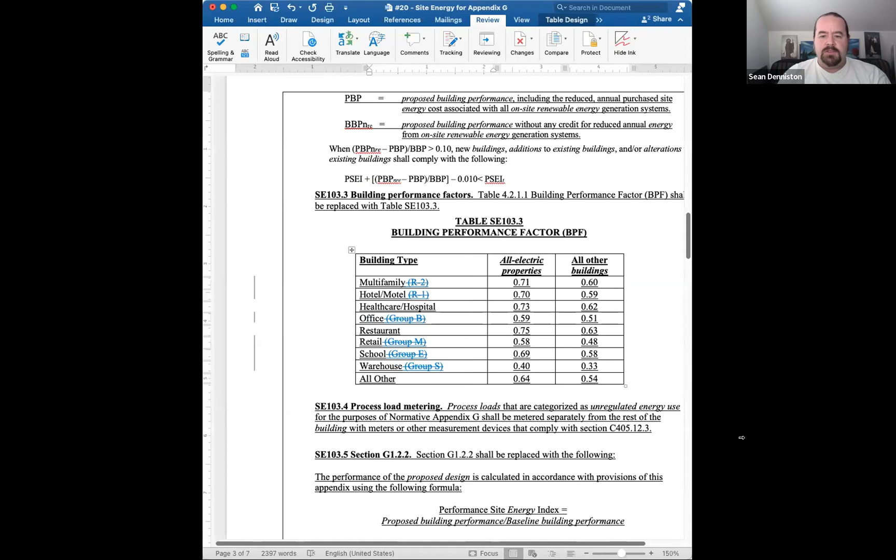So I can give a re-summary if the committee wants one, but in the interest of time, I'll just let it go to discussion. But we want to cover this completely. So if you do want us to go back through key elements, then we certainly can to get everyone back up to speed.

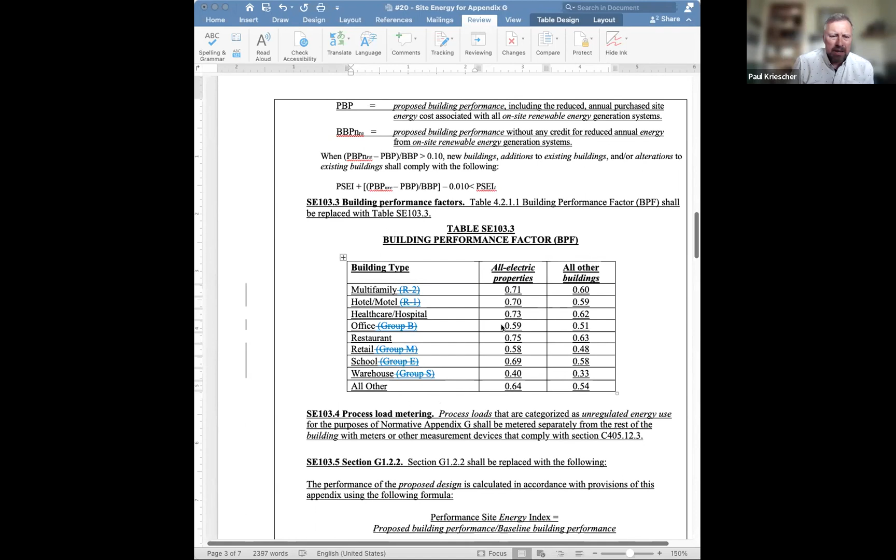Sure. So this proposal does a handful of things, and we'll cover what it does on that overview scale. Different from the last time the committee saw this, not the last meeting but when it came through the first round, the big difference is that the site energy compliance path has been moved out of C407, where it was nested with the energy cost Appendix G approach, and it's been moved into a standalone appendix. This is just for improved usability, so everything you need for site energy compliance is here in this appendix, and C407 is not cluttered with anything from site energy where there's potential for confusion.

Other than that, this proposal is similar to the site energy provisions that were in before. However, ASHRAE has come out with an addendum, CH, for Appendix G, which is using alternate energy metrics like site energy with Appendix G, so we've pulled all of that over. The idea here is we want to leverage the good work that ASHRAE is already doing. The addendum's not final, but it's very close, which means this is very likely what users will see in the next edition of ASHRAE, so this will provide consistency for users as they go through using Appendix G.

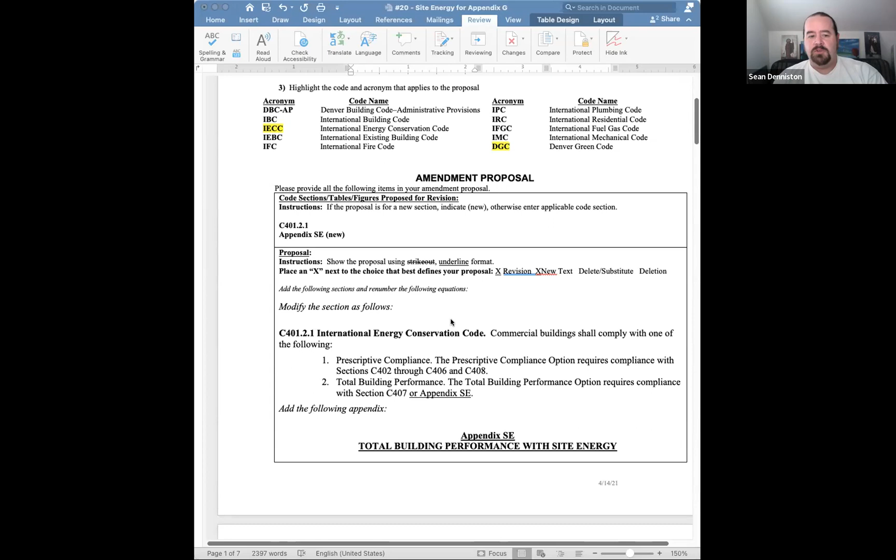Most of the modifications made to Appendix G here are really just to replace energy cost with site energy. So almost all of it is editorial, but that still means you have to hit all of those places where energy cost is mentioned.

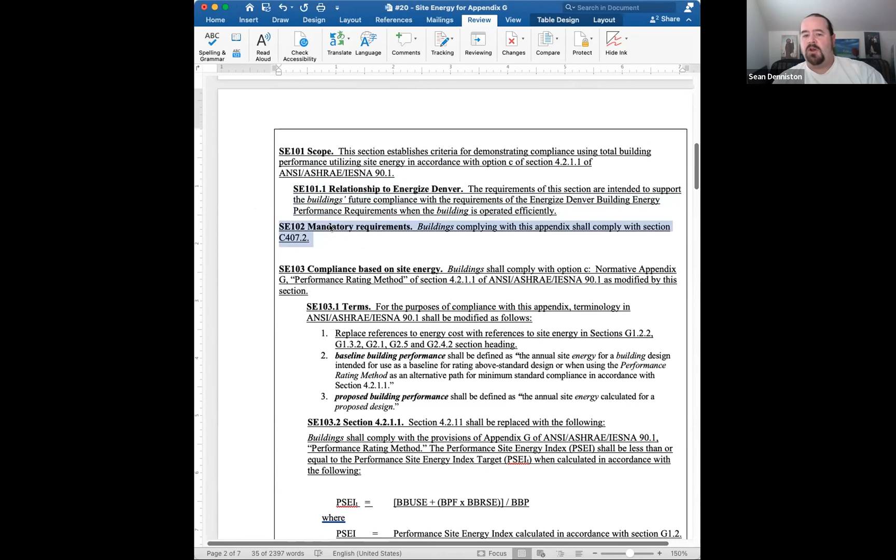A couple of key things here: there's just this pointer I'm highlighting to remind people that there is a connection to Energize Denver. There's no requirements here, it's really just informational, particularly for any practitioners coming from out of market. It includes the mandatory requirements that we saw for the regular Appendix G and C407, just for consistency, so that we're seeing the same mandatory requirements in all of our modeling paths, and that those are as consistent with the prescriptive path as possible. They're not going to line up entirely, but we want them to be as consistent as possible.

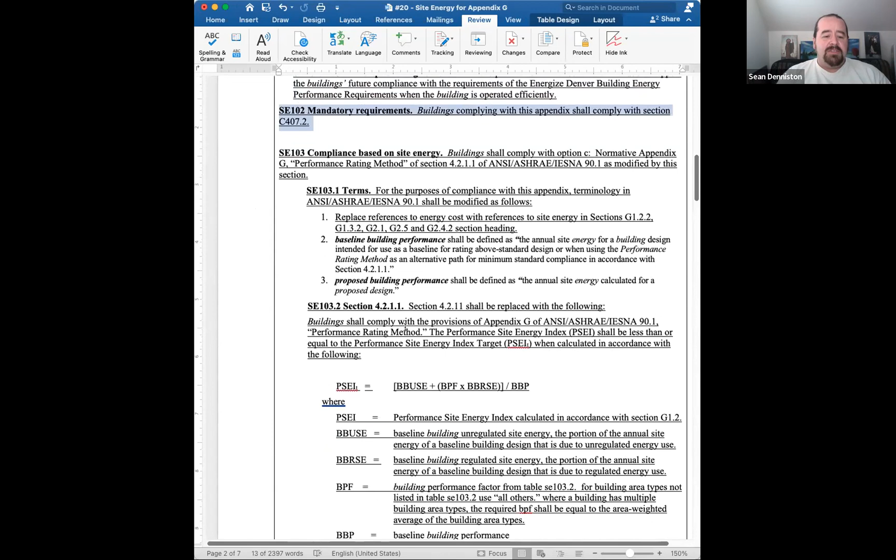And then the last thing to note is, down here in the table, these BPFs are based on the new methodology for creating BPFs, which tends to be a little less stringent in most cases than the old methodology, but these are still BPFs for ASHRAE 90.1 2019. So the stringency level is 2019, even though the methodology is 2021. And you can see here, this is the edit proposed at our last meeting to remove the occupancy types and just have the building types as descriptors, which is what we see in ASHRAE and the modification we've made in the other modeling paths.

So that's the quick high level overview. I'm happy to answer any specific questions anyone might have. Thank you, Sean.

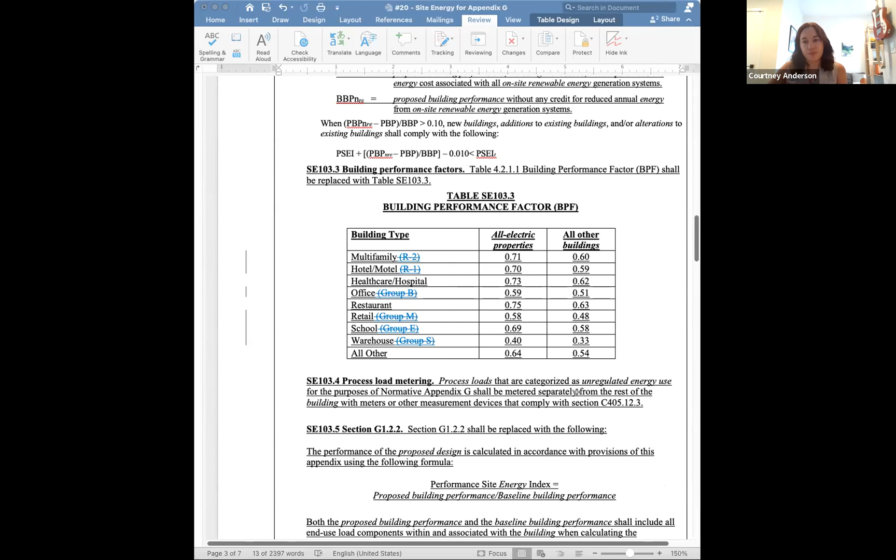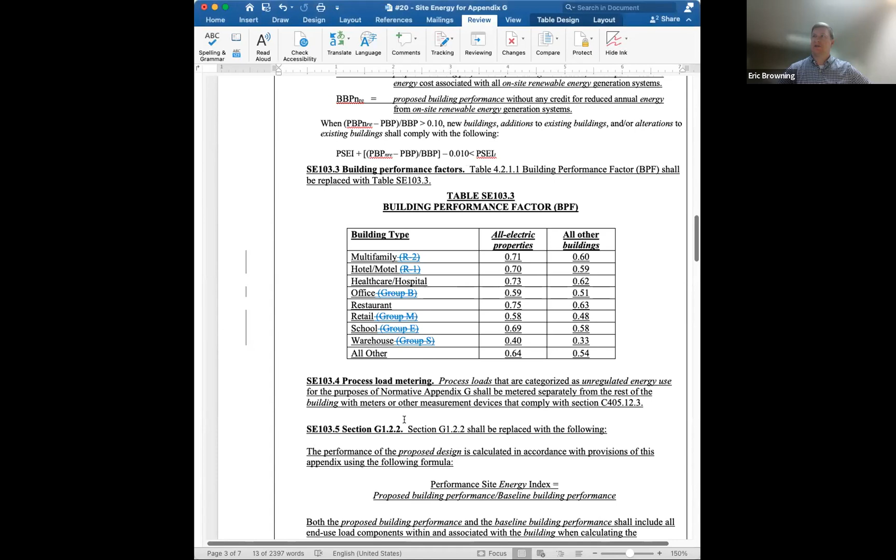Okay, great. Next hand up is Eric. Thank you, Mr. Moderator. I believe this is editorial, but for clarification, under section SE 103.2, which is above the table, in the equation shown, we have PSEI sub T in the primary equation, and then below, I believe we're missing the sub T on the PSEI definition right there. So I think that's just cleanup, I want to make sure we just need to do an editorial cleanup there. That's all, thank you.

Thank you. So the PSEIT is mentioned in the text above where it sets the target. The PSEI is what is actually calculated for the building. So the PSEI needs to be less than the PSEIT. Understood, thank you.

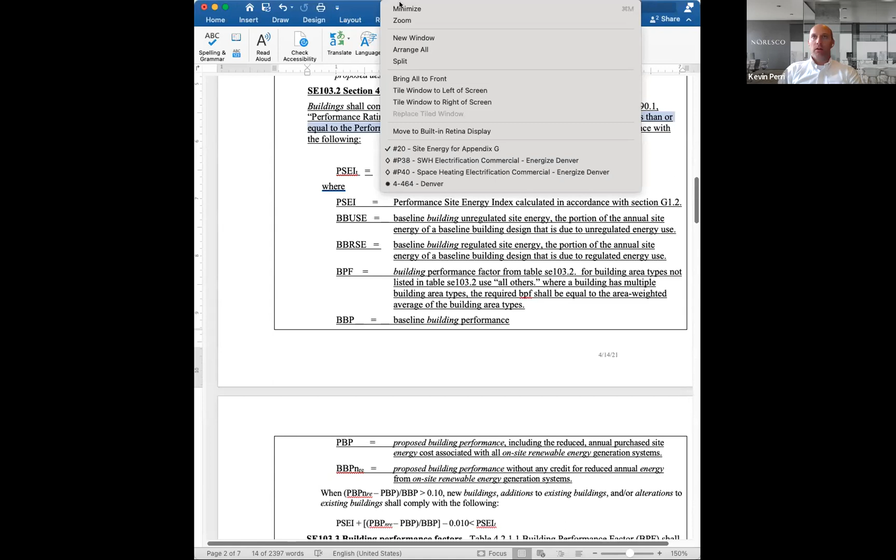Christine is on there. Let's see, I'm going down the list. Katrina, Robbie, and Sean. So if you want to see if we're missing anybody, call out their names to see if someone's filling in for a voting member, and then we'll get a count of voting members.

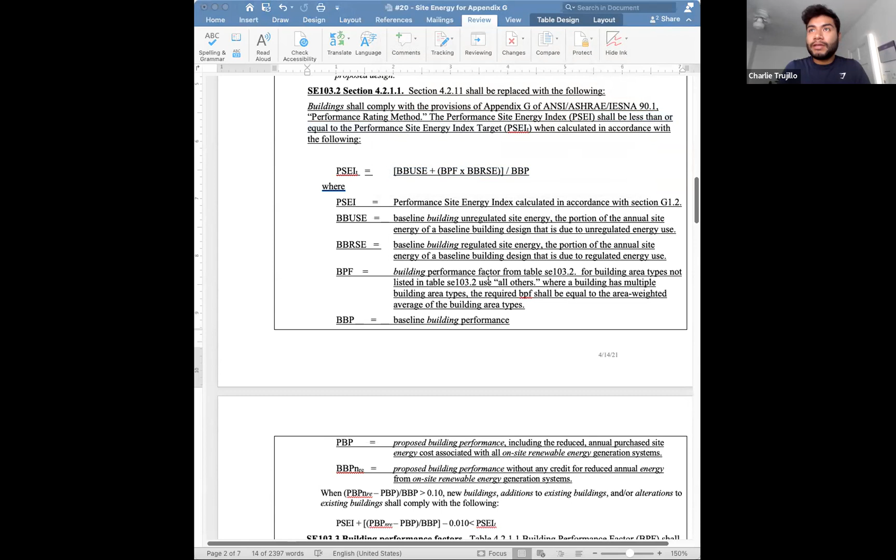Yeah, definitely. I think there might be more names to be accounted for. So I'll just quickly go over the names that are accounted for, and if anybody's substituting for somebody else, just make that known. The people I have accounted for are Aaron E, Alan Y, Brian K, Chuck K, Ashley W, Chrissy C, Chuck B, Courtney A, Elizabeth G, Eric B, Jamie B, John B, Ken U, Laura London, Colin Anderson - both accounting for 1 vote, Linda M, Mike W, and Paul K.

So if anybody is not listed or subbing in - Mike Rodriguez is here. Great, perfect. Got you. So that's everybody. We should have 17 votes being cast in. Okay, thank you. So 17 voting members.

I see John Arent has his hand up. Thanks, Charlie. John's a subject matter expert. John, do you have something to weigh in real quick?

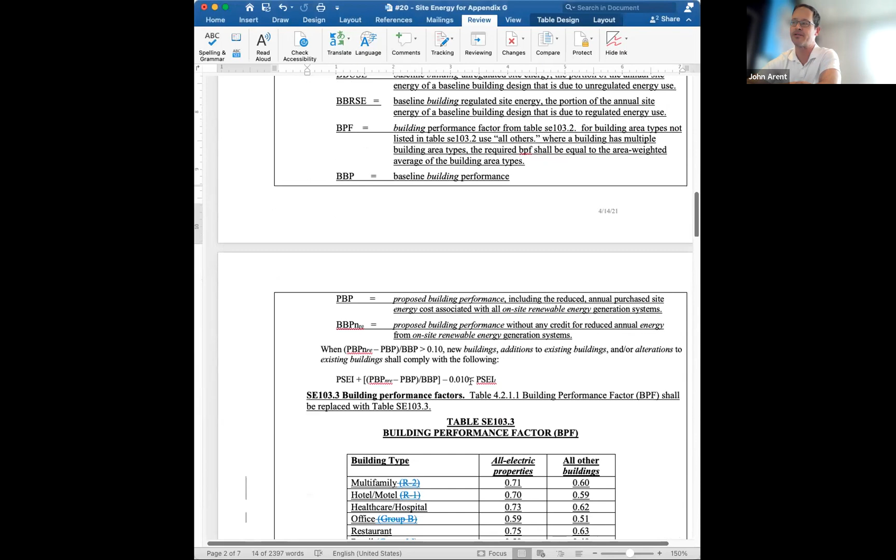Yes, this might be nitpicking, but certainly agree with the intent and everything here. The table for building performance factor lists all electric properties and then all other buildings. I don't know whether we're distinguishing properties from buildings in that context. I think the intent's probably well understood, but just to be a little careful about the classifications. I'm assuming a property could encompass multiple buildings, especially in multifamily.

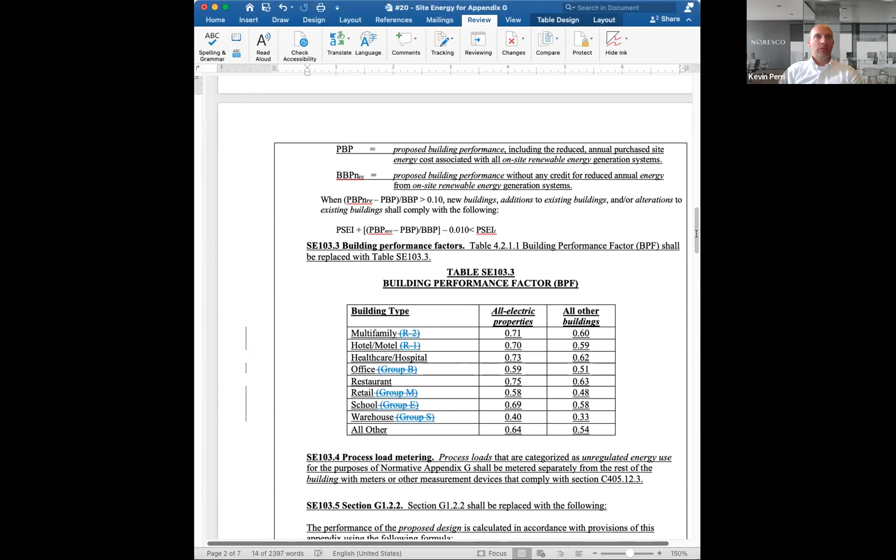Sure, so your concern is that the verbiage isn't consistent throughout, between property and buildings. Right, right. So the definition of all electric properties has been approved already in other proposals, and it's been leveraged as the definition. It was approved as properties instead of buildings so that it would get at gas infrastructure on the building site and not just in the building. Right. Okay, yeah, that makes sense. Thanks, Sean, that's what I was thinking. It might be due to the service wanting to restrict the gas service.

Okay, great, thanks everybody. We do have - looks like Sean stopped sharing there - but we have a motion and a second to approve as amended. So I'm going to call a vote.

All those in favor of approving as amended, please raise your hand. I see some hands move, I'll give it a minute here. I see 14, go ahead, and 15. Go ahead and lower your hands.

All those opposed, please raise your hand. Zero. And all those abstaining, please raise your hand. I see 1. Okay, so item number 20 is approved as amended.

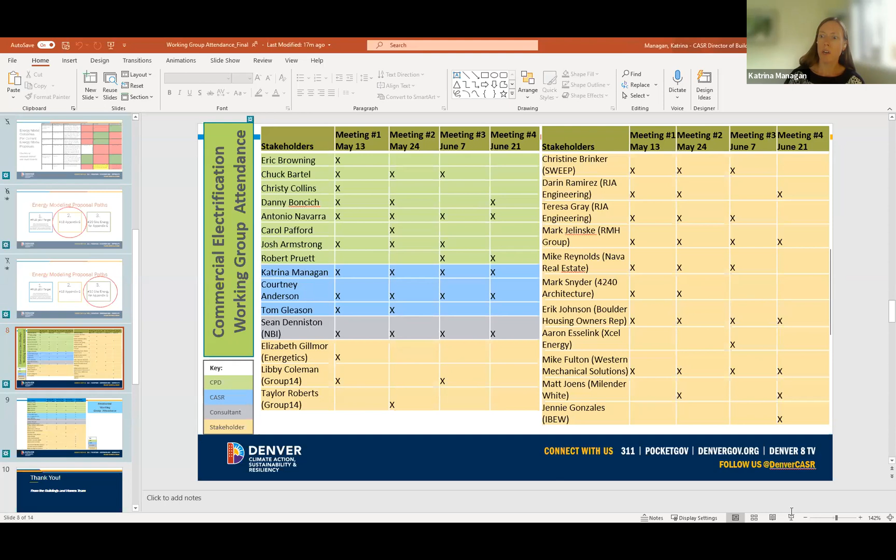I want to share with you who is in the working group now so you can see who participated in the process. This was the biggest working group of all of them, and we had a lot of participants and expertise from mechanical engineers, owners, reps, and developers, from Xcel Energy. We had labor unions there, and energy modelers there.

I would characterize where the working group landed on both space heat and water heat as that sort of careful balance. These proposals are now proposing requirements that are a little bit more ambitious, or have new buildings doing at least as much as is maybe the better description, as Energize Denver.

We restructured the alignment of the proposal so that it really aligns with Energize Denver and does not allow fossil fuel furnaces or electric resistance space heat. Similarly for water heat, we restructured the proposal to very directly align it with Energize Denver, so it does not allow fossil fuel storage water heaters.

Those are the first system types regulated by Energize Denver in 2025. So this proposal really aligns with Energize Denver to require electrification of those easy-to-electrify systems as a first step. There's also an effective date of January 1st, 2024 that gives the community time to adjust. With that introduction, I'll pass it to Sean to walk through the details of the proposals.

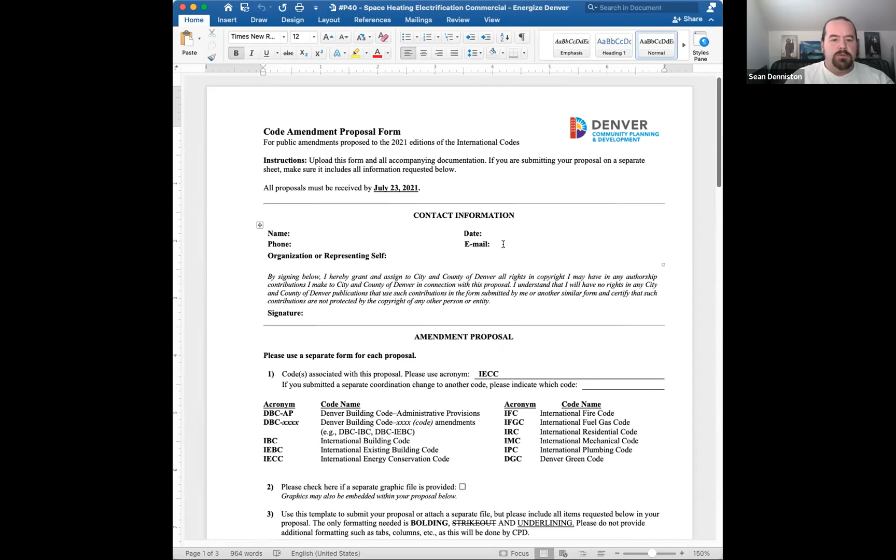So you are looking at the space heating proposal to start with. Let's get to the meat of the proposal. What you'll note is that the opening line is pretty straightforward: it says fossil fuel warm air furnaces and electric resistance space heating equipment shall not be permitted to be used for space heating. So really the key for this whole proposal is the exceptions.

That's what the working group spent its time trying to really dial in, these exceptions, to make sure that reasonable systems that might not strictly conform were still allowed. One of the first key things is that certain building types are required to have their space heating on backup power. Hospitals is a common example. The working group wanted to ensure there was an exception for those, so that backup power systems wouldn't have to be sized for electric space heating, which could be a rather substantially sized system.

It also exempts any makeup air systems where energy recovery ventilation is prohibited by the International Mechanical Code. There are certain situations where it's difficult to do a heat pump system for makeup air unless you're using energy recovery ventilation, but there are certain situations where energy recovery ventilation is not always allowed. There's some nuance to that — you can use specific types of energy recovery ventilation in very specific situations, but we wanted to keep this simple, so we left the exception broad. We wanted to make sure we address this specific design situation.

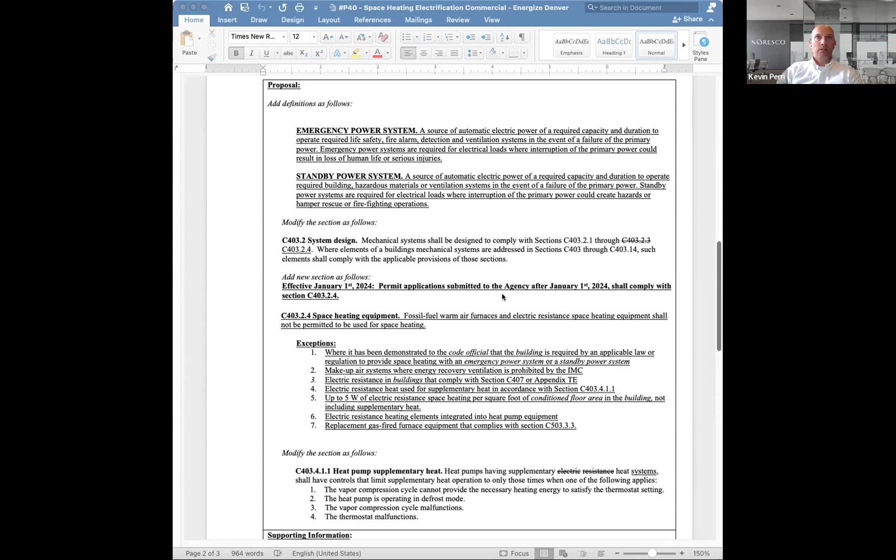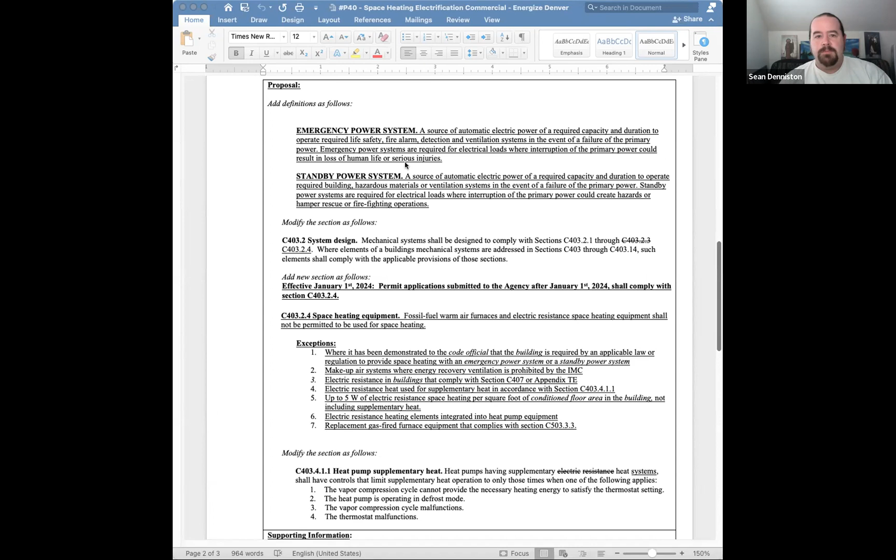Oh, thank you. I'm still sharing the wrong one. Let me share the right one. Oh, still the wrong one. I apologize. I think I have too many things open. All right, are we the right one now? Okay, I'm seeing a couple of nods. Yes. Thank you for catching that.

So in this one, we see very similar exceptions: resistance heating elements that are integrated into heat pump water heating equipment, want to be clear about that. Also, electric resistance elements used for recirculation loop temperature maintenance. This is typically heat trace, but there might be other applications. The idea is that we want to have these specialized heating elements where it's just keeping the warm water warm and it's not the primary system, that we still want to allow that kind of flexibility.

Any electric storage water heaters with a rated storage volume no greater than 20 gallons—so this allows electric resistance for these pony water heaters. You might see these on a lavatory or as a boost heater at the end of line. There aren't good heat pump alternatives for these right now, and the loads are fairly small, so it is reasonable to have an exception for these.

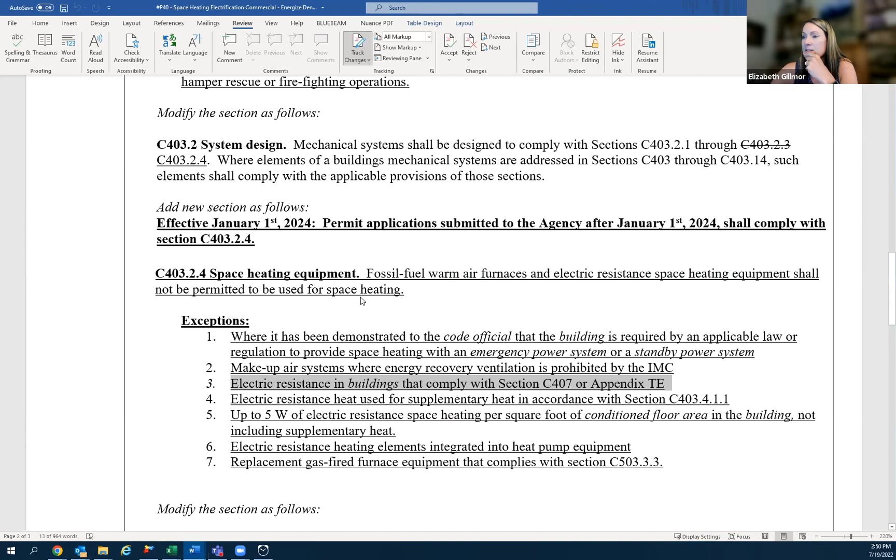Right, so let me make sure I'm understanding. If I compare exception 3 between the two proposals, one difference is the name of the appendix, TE or ET, and the other is that the water heating proposal does not limit that flexibility to electric resistance. Oh sorry, it's not number 3 in this proposal, it's number 9.

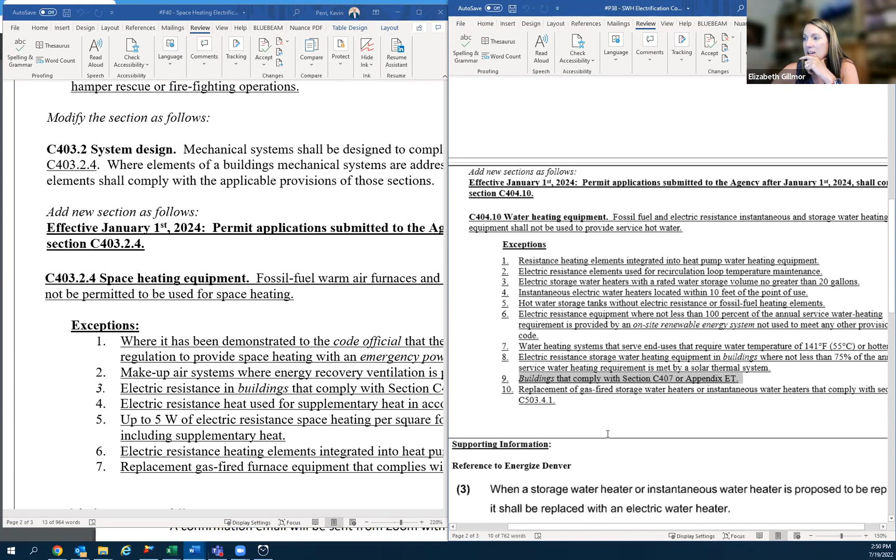So if we compare exception 9 in the water heating proposal to exception 3 in the space heating proposal, would the proponent allow those to match? And I think that might help ease some concerns in all the what-ifs, where you're still allowing some flexibility while still meeting Denver's goals. Since the working group worked these up separately, I'm actually not sure why those two are different, and if maybe exception 9 was meant to be only for electric buildings or not.

That's something the committee can certainly discuss, and I can check to make sure we get the right phrasing for the appendix name. One of them is right and the other is wrong, so we can make sure it's right in both.

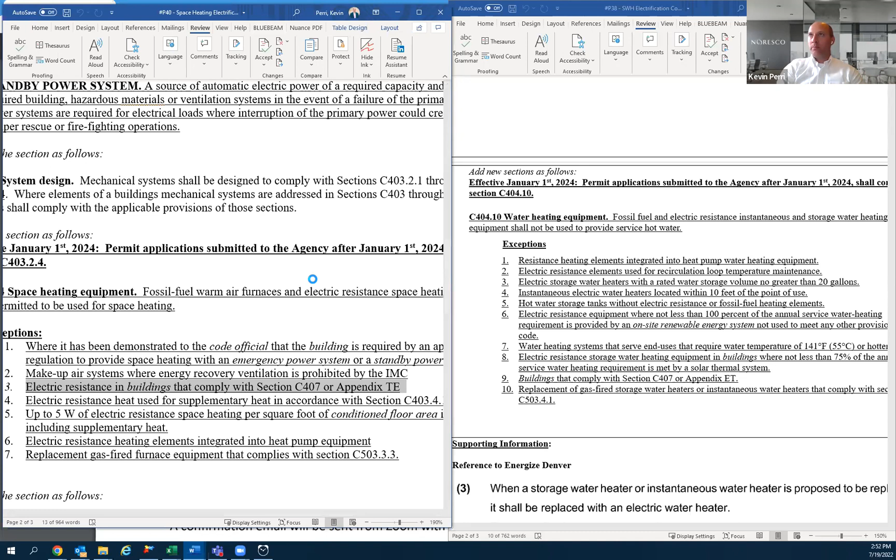So going back, we're on item P40 next, and we're in the question period. The next question comes from Chuck K. Go ahead, Chuck.

Just a general question. It seemed like Mark Jelinski was certainly in favor of the overall thrust of electrification, but had some specific concerns about minor details. I wonder if he could propose amendments, but it doesn't look like he's on the call anymore.

To answer Chuck's question, since Mark is not a committee member, he cannot propose any modifications. However, the committee can on his behalf, but him speaking from the general public cannot do that.

Yeah, I understand that. It just seems like it would have been worth a discussion with him to see if there are any changes the committee could propose that would make him more comfortable with it. Noted. Just so you know, he will have a minute for a rebuttal on both of these, so maybe he'll do so during that minute, and the committee can consider some of those.

Any other questions, Chuck? No, not on this one. No, the next one later, the hot water one, I'll have a comment. Okay, great. Next question for P40 comes from Jamie.

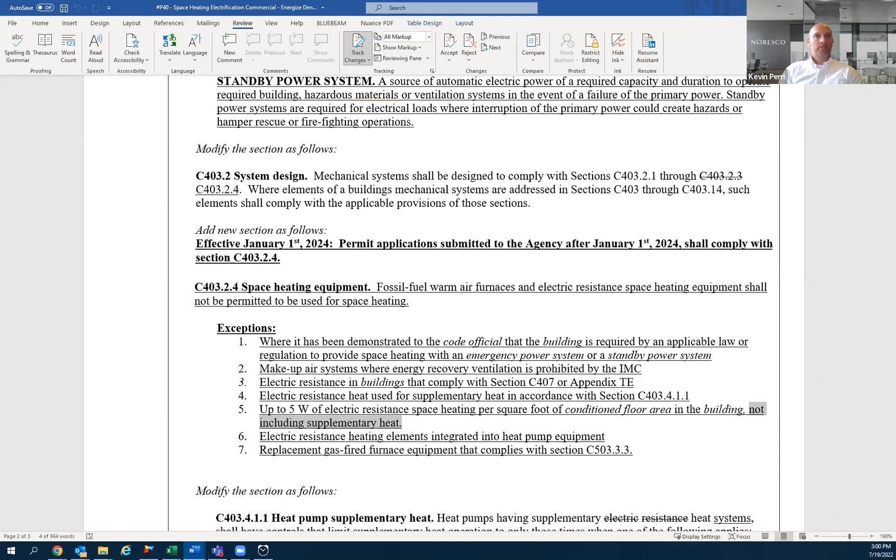Yeah, I just sort of wanted to address, I guess, Mark's comments and Chuck's comments. Mark's comments about picking winners and losers, that this proposal does address just furnaces. And I think the unit heaters is interesting — how are we addressing unit heaters? And then allowing boilers to still heat entire loops of buildings. So we're allowing gas, we're allowing whole high rises to be built using a gas system still. So I think it is sort of picking winners and losers, and I do have concerns with this proposal on that topic.

And then another small item, just in C403.4.1.1, we've crossed out electric resistance, and I guess that would be more for Sean. Do we still need to cross out electric resistance in that proposal? Because I think originally the idea was to encourage the use of heat pumps and allowing gas as the backup, or as supplementary, but now the gas is being prohibited. Do we still need to delete the electric resistance from that section?

So it does still allow gas to be used as supplementary, and that's why it was configured that way, of crossing out the electric resistance. That is maybe less important in new construction, but will be more important for the existing building section. But it has been something that has stayed as part of the proposal as it has gone through.

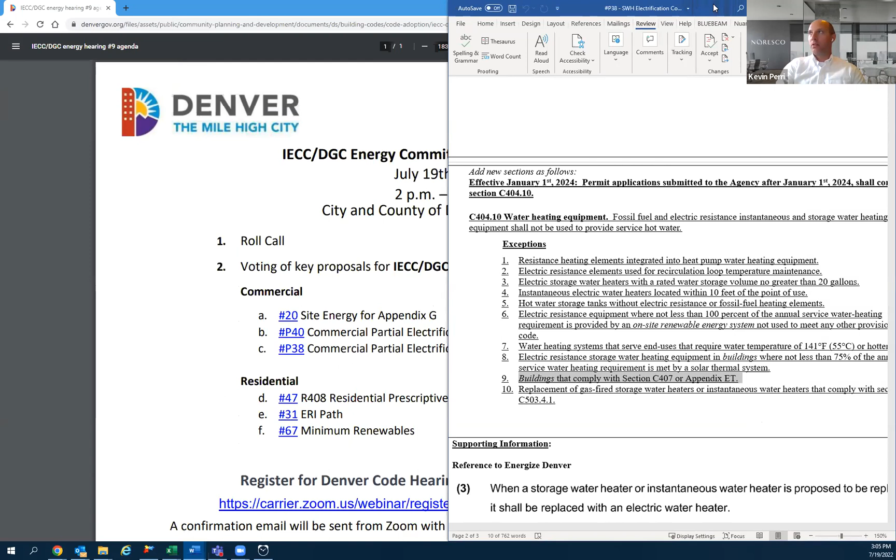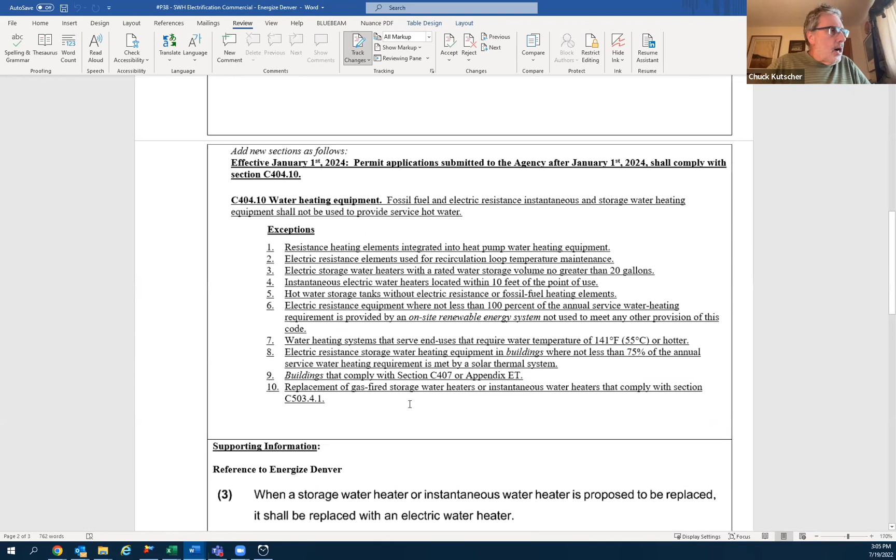Chuck K: Yeah, I have a question. I wanted to preface it with a general statement. A representative from Denver said that climate change is an emergency, and I very much believe that. So I think we are at a point where it does make sense for a government, with proper input from experienced engineers, to pick winners. I hate to see the government pick losers, but I think it is appropriate to pick winners. Just wanted to make that statement.

I have a general question about the case of domestic hot water: was any consideration given to using a mixing valve so that scalding temperatures can be avoided, but the storage water can be run up to higher temperatures to allow greater storage for demand response capability? I'm wondering if that was considered.

So the issue of raising tank temperature in order to increase the capacity on heat pump equipment was discussed, but there wasn't any discussion of actually including thermostatic mixing valves as a requirement in the energy code, or requiring higher tank storage temperatures in general. I have not looked at Denver's plumbing code, but I know some plumbing codes do require a thermostatic mixing valve if the storage temperature is above a certain temperature. We could check to see if that's the case in Denver.

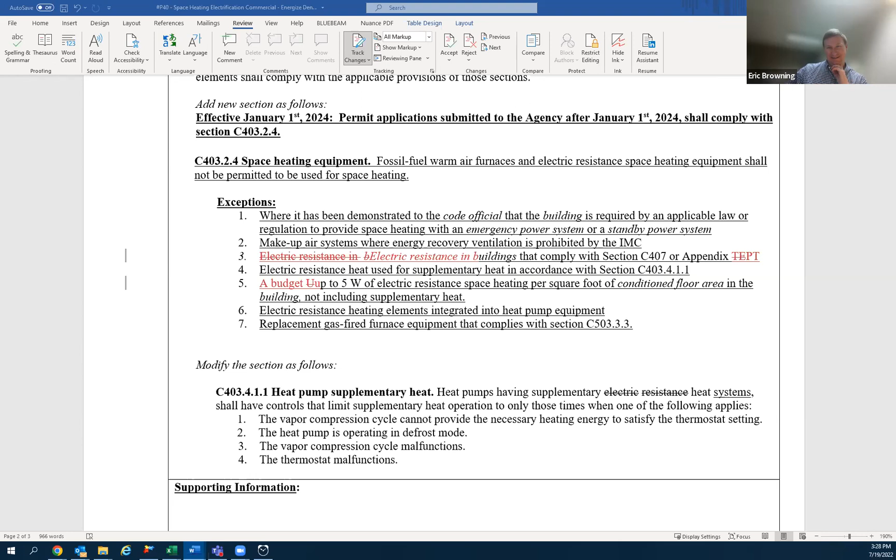My model thinks it does. I always have to break it out if my plenums are conditioned. So I would think it does, but does it make sense to add some type of clarification if the definition here that's highlighted of conditioned floor area is not explicit in that respect? I guess what I'm suggesting is that it should count as conditioned floor area, such that if you've got a heated plenum, now I've got extra floor area that is conditioned, versus if I don't have a heated plenum. Does that make sense?

So tracking the definitions as they're used in the IECC, a plenum would only be considered conditioned floor area if it were constructed with a floor, in which case you probably wouldn't consider it a plenum. So for something to be a conditioned space, it has to have a floor. And so for something to be conditioned floor area, only the conditioned spaces count as conditioned floor area. Conditioned spaces have to have floors.

So it has a floor in the sense of a thermal envelope, because that is a floor surface area. It doesn't have a floor that I can walk on, but it is still part of my thermal envelope as a floor. Is it in that sense?

Maybe it would just help to add a clarification here, or add another line item or something for heated plenums or something like that.

So if a line item is added for the plenum area, that would basically give an increased budget to all buildings that had heated plenums. So I think there would need to be discussion of whether that is a desirable thing or not.

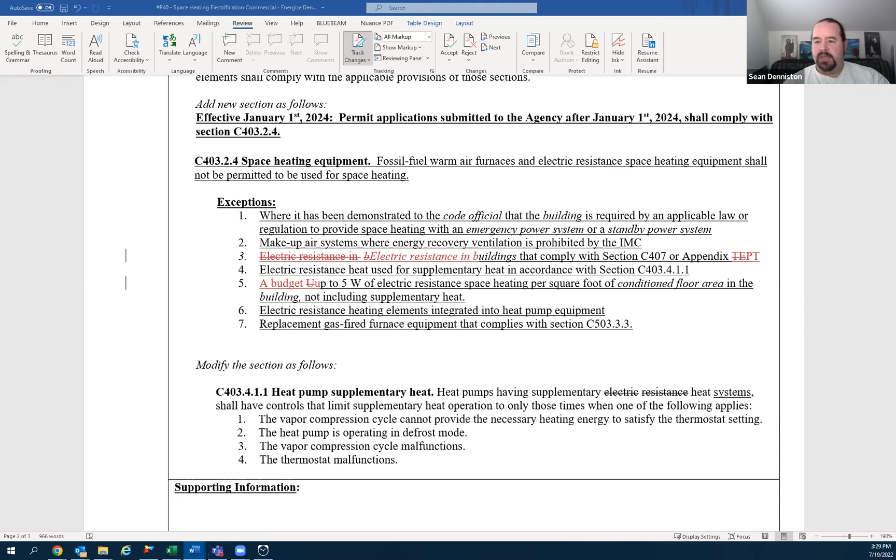To give a bonus for those who choose to keep pipes warm with a heated plenum - that would be my proposal, because I don't have good alternatives to that scenario.

If that is the intent, a cleaner approach might be to just exempt electric resistance in heated plenums, if that is your intention, and let the committee decide whether they want to allow it. Okay, I would like to propose that as an option, and partly because we've done a lot of modeling.

Okay Elizabeth, did I get that correctly on the screen? You want to add another exemption that reads 'electric resistance in heated plenums'? Yeah, I think that's good, unless other folks have suggestions on better ways to clarify that.

Ken, Jamie, thoughts? Let them ponder that, but Jamie, go ahead. We're already excluding heat trace, right?

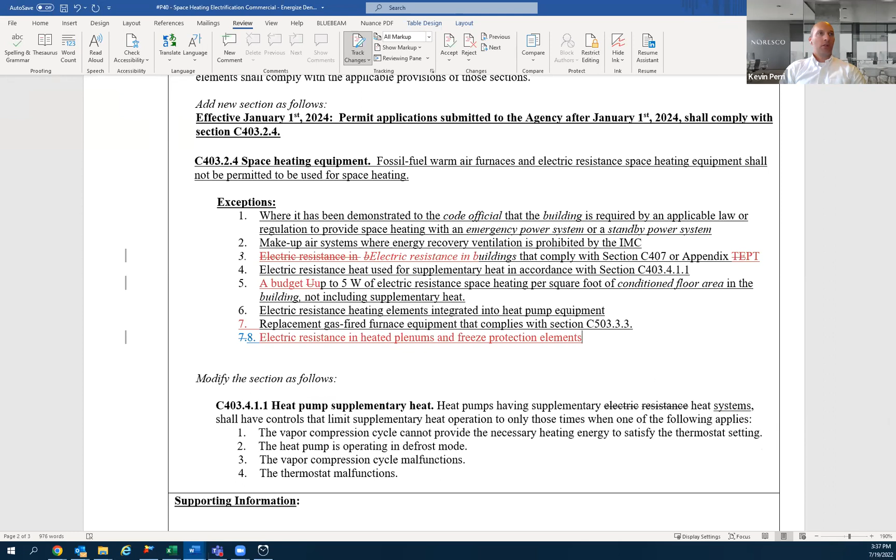Works for me. And then I don't know if that's proper IMC language. It gets the point across though. Sure. And Chuck B, since you had a second, are you okay with that update on that?

Just a technical note, phrased that way, the system would have to do both to qualify for the exception. So I think you probably, if you want both of them as exceptions, they should each be their own exception. Could you put an or?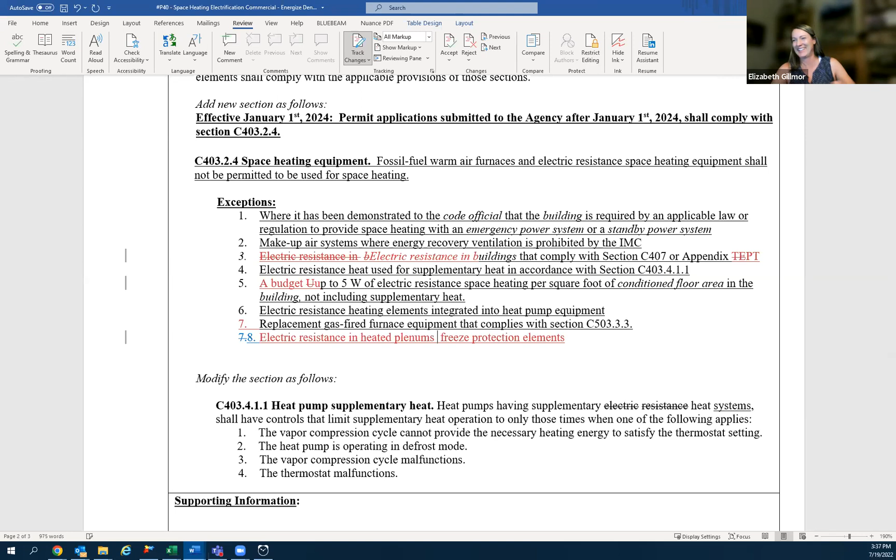Would that suffice? You could. Some code snobs would get mad at you. I was just trying to save you a line of code. The rule of thumb is that if you put an or in an exception, it means you need a new exception. All right, there you go. But that's like the grammar Nazi version of the code world.

Okay, and I think you would need to repeat the electric resistance for the freeze protection. There you go, beat me to it. Okay, so Chuck B shook his head that he's okay with the second on this. Good. So there's a motion and a second. Jamie, go ahead.

My only comment on the sort of cleanup that we're trying to do on looking at exceptions for heat trace and others is, so where would a sump heater go for a cooling tower? Is that, it's not space heating equipment and it's not exactly in the service water heating either. So is it okay and just not covered by any of this? And so it's exempt to begin with?

Did you say a sump heater? A sump? I didn't quite hear what you said. Yeah, and a cooling tower. Yeah, freeze protection. So that would be in the basin of the cooling tower. Mm-hmm, if I've got electric resistance heating elements in like towers.

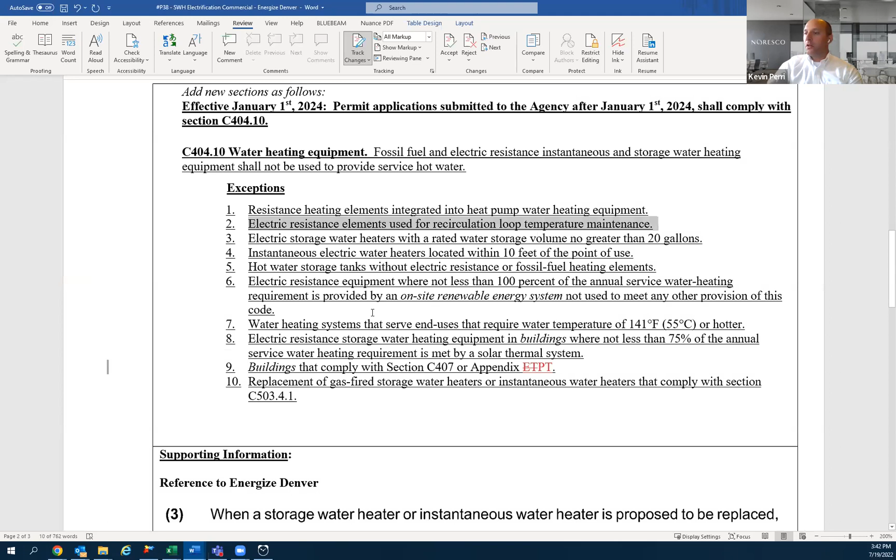Now we'll move on to item 38. Let me pull that up for you so it's on the screen. All right, so committee, this is your time now for modifications or other motions on this proposal or discussion. Elizabeth, go ahead.

Only because I probably should have known this, but I was confused by the phrasing. Is it possible to clarify this from water heating equipment to water heaters, or service water heaters? I say that because when I think about it, all kinds of things heat water, right? But I think your intent is for service water heaters, correct?

It is service water heating equipment, yes. Okay, and I might say that I don't know, like water heating equipment is... I know water heaters are defined, but is water heating equipment defined? And that was where my confusion was. And I know this is semantics, but finding a definition for water heating equipment as opposed to water heaters, which I can find.

So equipment is defined, but it's not defined as water heating equipment, doesn't have a standalone definition. And I know this is kind of silly semantics, but I think that'll confuse people, because I would say that boilers heat water also, but I don't think that's your intent.

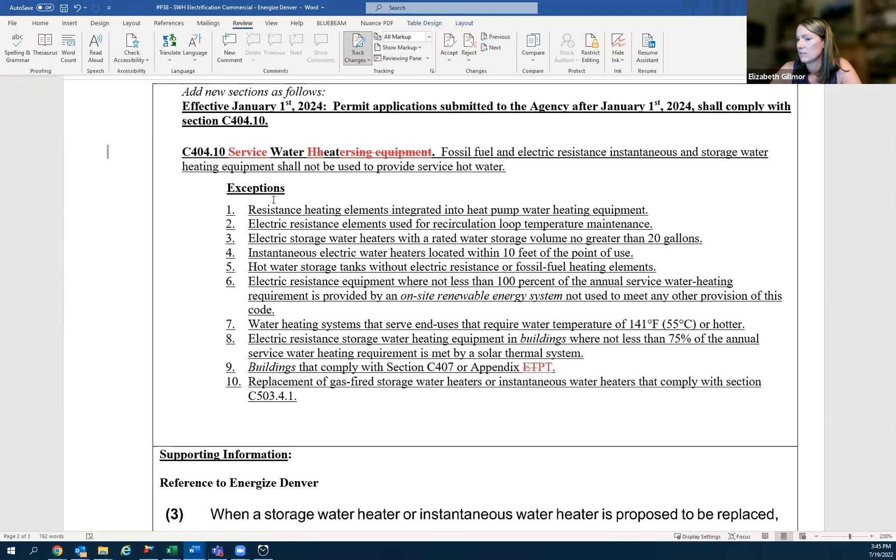We will let Sean ponder that, as he has a little pondering on his face there. But there is a motion out on the table from Elizabeth. In the meantime, we'll continue and let Sean ponder some more. Chuck, go ahead.

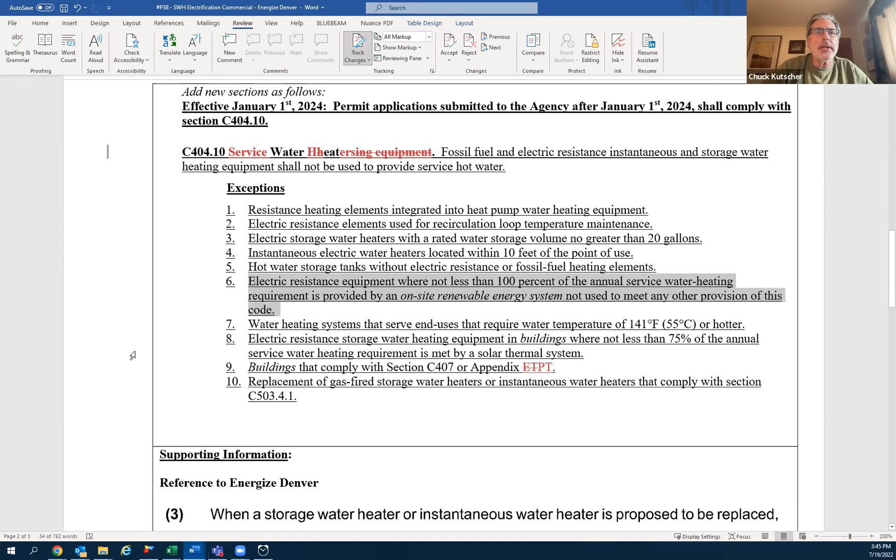I want to make sure I understand item 6, the exception where not less than 100% of the annual service water heating is provided by on-site renewable energy. I presume that refers to a solar thermal collector system, is that right? This refers to any electric resistance water heating equipment. You just have to supply an on-site renewable energy system that can power it. This parallels the requirement in Energize Denver, which allows electric resistance water heating when it's served by a dedicated on-site renewable energy system.

But my question is about the on-site renewable energy system. Is that referring to solar photovoltaics or solar thermal or both? It could be either. It could be wind. It could be true geothermal, as long as it's actual production.

The reason I ask is we're not seeing very many solar thermal systems anymore with the advent of low-cost PV and heat pump water heaters. But for a solar thermal system, if you wanted to allow that 100%, is that allowed under item 8? It's a little different because a solar thermal system, if it had a backup, wouldn't be 100% solar thermal. And 75% is kind of in the ballpark of what would be reasonable.

So getting back to item 6, if you did have an on-site solar photovoltaic system, wouldn't you still want to encourage the use of a heat pump water heater to make the best use of that solar electricity? Why would you want electric resistance equipment in that case?

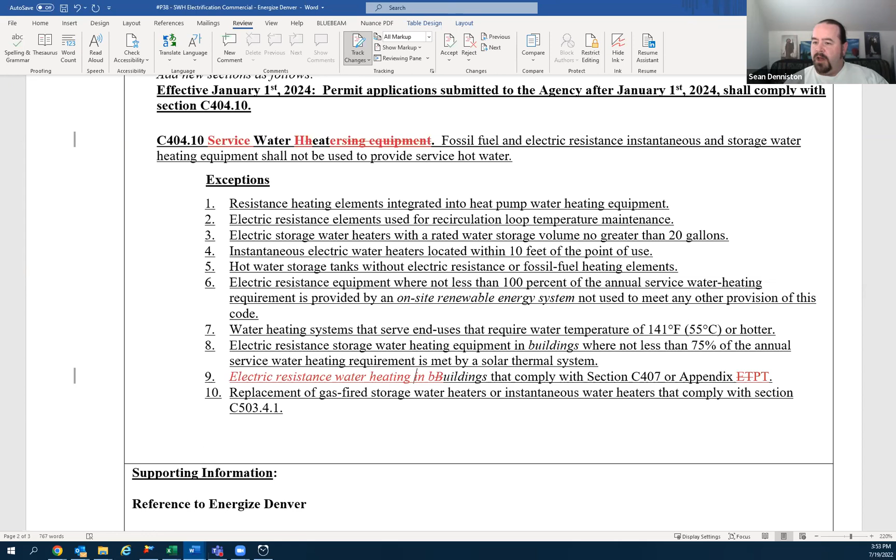Pools. So something other than a boiler? Well, since boilers aren't included in this - pool heaters are always interesting because they're still a water heater. When they get over a certain BTU they're rated by ASME, but they're really not a boiler. A lot of them go right up to the limit of 399 MBH to avoid that listing. So I just don't think there's a lot of good options for pool heaters using heat pumps currently available. I mean, I think it's definitely an option, but I wonder if in this proposal we should specifically call out pools, break it out separately.

Sorry to speak out of turn, but we do know water heaters is defined, as you mentioned Chuck, as potable water. So does it solve it just to remove the word 'service' and just call this 'water heaters'? I'd be good with that. Because I think you make a good point - service water heating does expand way beyond potable, that's a whole section 404, that's everything. So if we want to just call it water heaters, that is defined. So maybe we just delete that word.

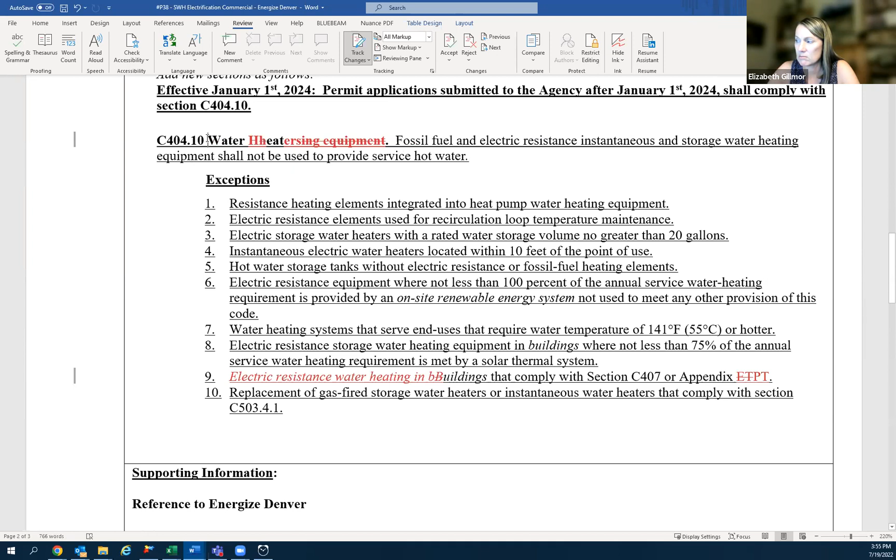Okay, does that help? Go ahead, Chuck - I think she was asking if that helped. No, I agree, I like it because it leans on the definition that's already in the IECC.

If you wanted to do that, you would need to change it in the body, Jamie. So where it says fossil fuel and electric resistance, instantaneous and storage water heating equipment, you would want to change that to 'water heaters.' That's what would actually make it happen - making the change to the title doesn't impact the code requirement. Thanks, John. Yeah, let's please do that.

Okay, next up we have Jamie. Yeah, just thinking about the exceptions and various nuances - how do you define 'require' in exception 7? I guess what's preventing me from speccing something that just has a leaving water temperature of 142 and just working around this? Anything you did to down-mix it at the point of use would demonstrate that it did not require it. Okay, to chew on that.

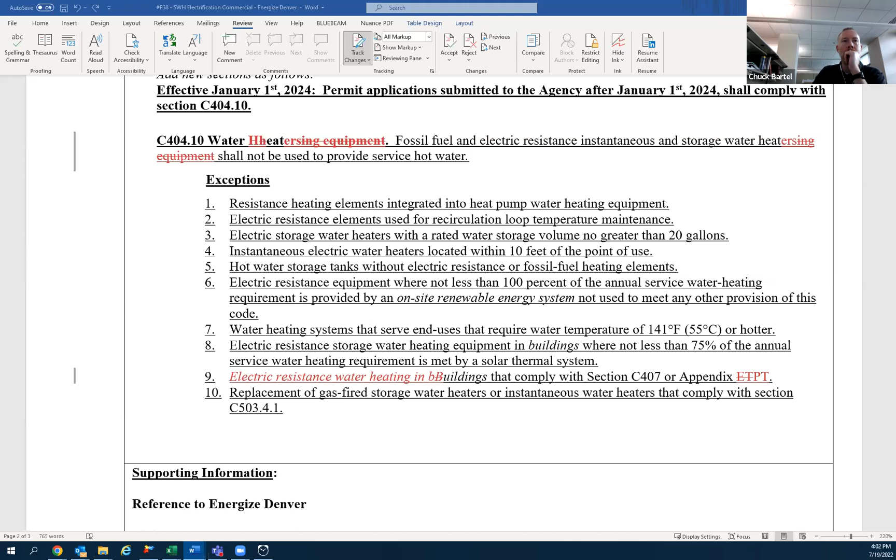I keep putting Chuck on the spot. Thank you, I appreciate that. No, there's currently no Denver specific amendments, and the IPC that's adopted does not address Legionella directly. Obviously it's something that's discussed in other forums like ASPE, etc, but it's not something that's code regulated here in the city of Denver. So since the end use does not require water at that temperature, your superheated Legionella-fighting design would not qualify for the exception under this.

Okay, I see no more hands up. We do have a motion on the table. It needs a second to be voted on, or else it falls. So is there anybody else that wants to have discussion or make a motion or a second?

Just to remind you, the motion on the table is to change the name of section C404.10 to water heaters, and then in exception number 9, adding in the terms electric resistance water heating in buildings that comply with blah, blah, blah. Eric, go ahead. I'll second that motion. Okay, so there's a motion and a second. Thank you, Eric, I will call a vote.

All those in favor of those modifications, please raise your hand. Okay, 16, go ahead and lower your hands. My hands are down. All those opposed, please raise your hand. None. And all those abstaining, please raise your hand. None. Okay, so that motion passes.

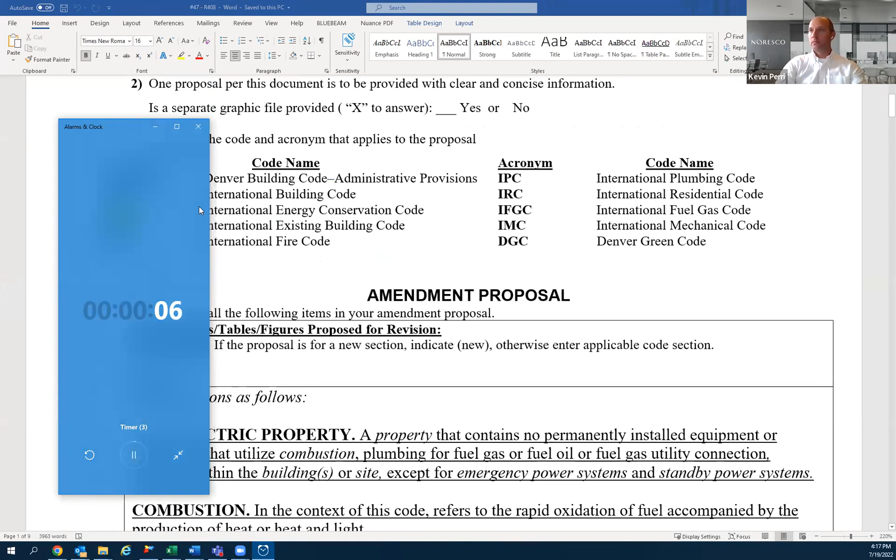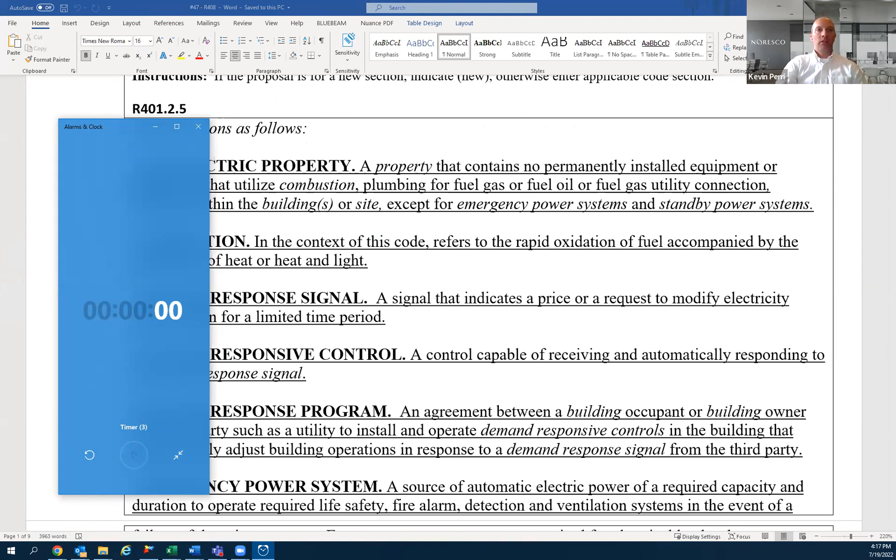Okay, welcome back everybody. We are going to continue on to the residential section of today's meeting, item number 47. I believe, Sean, you're going to introduce us to this. I'll let you take the screen if you would like. I think similarly, I'm going to start the introduction of the working group's work. That works for me, Katrina.

All right, so just to introduce you all to the residential working group, let me share my screen. This is the group of stakeholders who met to discuss the residential proposals over the 4 working group meetings. I'd call your attention in particular to look through who was there from the yellow stakeholder groups. We had a heat pump manufacturer and distributor with Mitsubishi, a couple of the home builders who are on the committee, Bill Rictanis and John Dutch.

One of our Denver Green Code committee members, Jonathan Fertig, who's an architect. Our Rocky Mountain Institute, Rob Buchanan from Xcel oversees their residential programs for new homes. Christine from SWEEP, Mark, who's a committee member. So pretty good participation from the community.

As we can start to consider the R408 proposal, this of course is the residential prescriptive path that requires teams to achieve credits. There are different credit requirements in this proposal for an all-electric building and a mixed fuel building. It also incentivizes partial electrification, but there is still a path for gas buildings by requiring efficiency points or achieving efficiency points and having gas buildings. So the credits here will add flexibility for project teams that choose a prescriptive path for permitting a residential building.

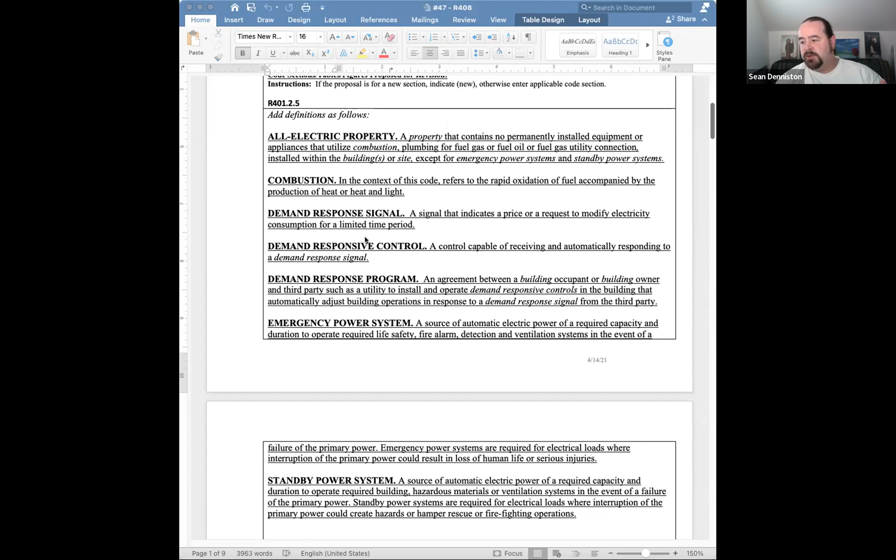You'll see the demand responsive signal control and program, because we have a similar measure here for demand responsive controls that we did in commercial. And then of course we pick up these definitions for emergency power system and standby power system.

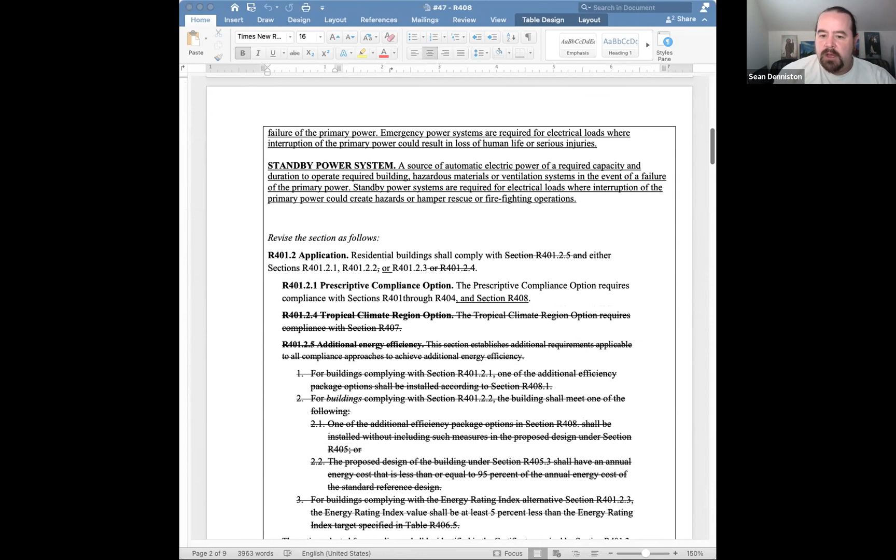There's one of the things that occurred as part of the discussion in the working group was just that the working group bumped up against the reality that the IECC implements 408 in a very awkward way. And so originally this proposal worked within the way that the IECC 2021 adopted R408, but because Denver is looking for more efficiency, it really just highlighted that problem. So instead of this...

R401.2.5, additional energy efficiency to implement R408, that whole thing was crossed out and R408 was just added to the prescriptive path in R401.2.1, which you see toward the top of the screen. And the efficiency that is represented by R408 is added to R405 modeling, R406 ERI path. So that is a cleaner and much more understandable way to deal with R408, especially when we get into the discussion of minimum renewables, where we might be asking for additional efficiency even above and beyond R408. I'll also just mention, we went ahead and removed 401.2.4 since it doesn't apply to Denver.

So make sure that here you see in R405.2, this is where that implementation of the efficiency comes from. And like in C406, we have an all-electric building that just has to meet IECC 2021 levels of performance. It is only the mixed fuel buildings that we are asking for more. So here, that's where you see this occurring, is that it's one requirement for all electric and then the other one for mixed fuels. All this does is align R405 with the prescriptive and R408.

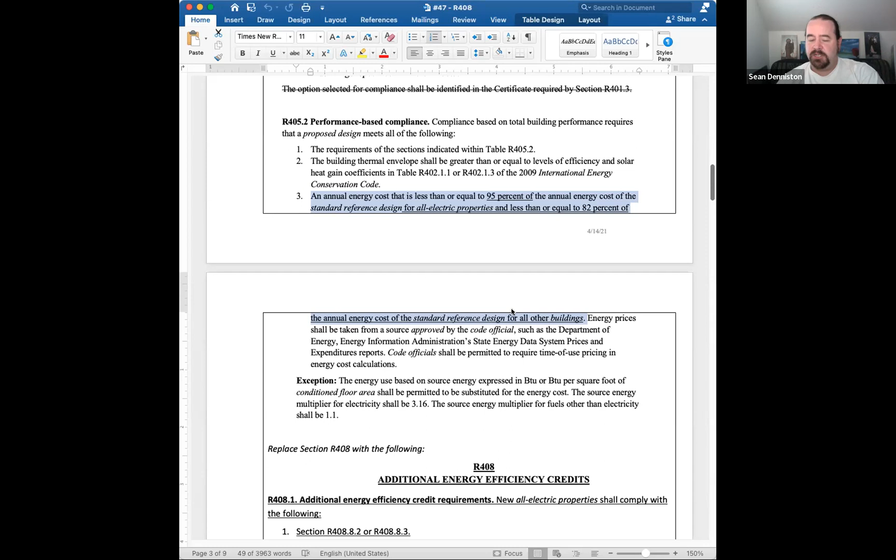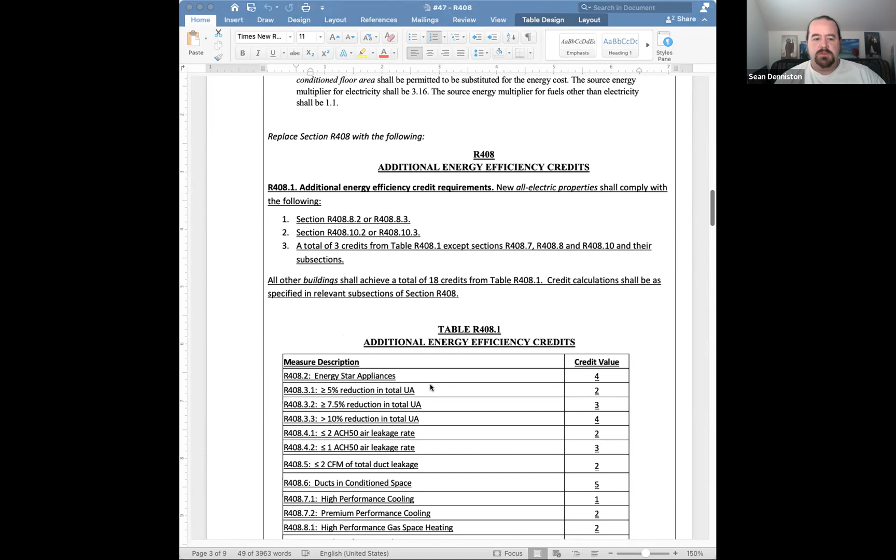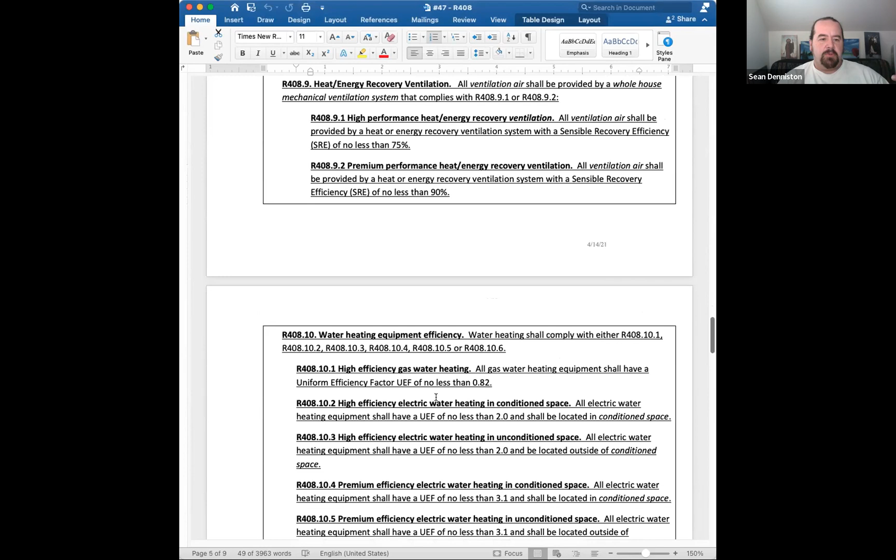And then most of the rest of this should look pretty familiar to you. You'll see the credit values for each of these individual sections. The working group did quite a few things to refine and really dial in some of these requirements, and so things like clarifying that you can use heat recovery ventilation, and making sure that all of the language was and the numbering was just right. I'll go down to where I think some of the bigger...

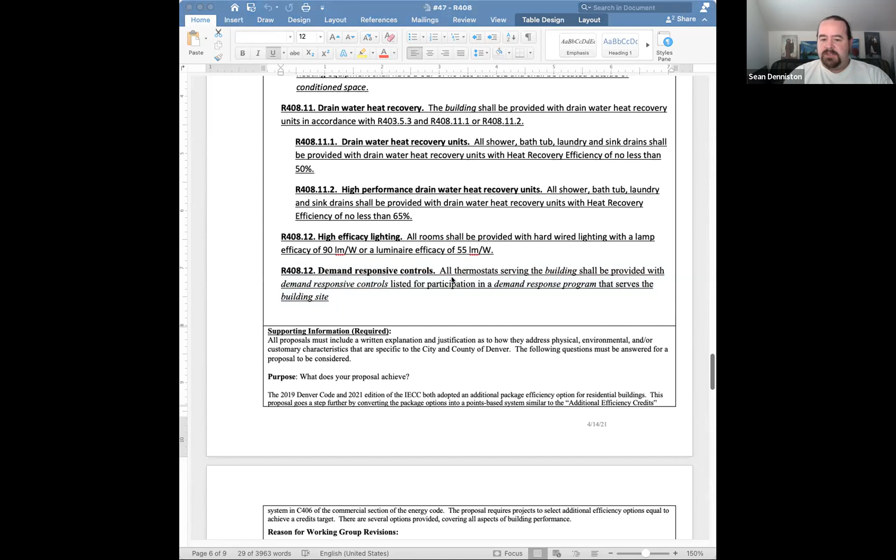Here's where we see the addition of demand responsive controls. And again, it's like we talked about in C406, the same setup where they have to be listed for participation in a demand response program that serves the building site. So this does allow buildings to use demand response to get some extra points within this system. So I'm happy to answer any questions that we have about this.

And Sean, the only other thing I might add, just to clarify for the committee, since I know neither John Dutch or Bill Rectanis, who are maybe the most involved committee members in this working group, are here at the moment, is just remember there's 3 residential proposals before you, and this is the first one, right?

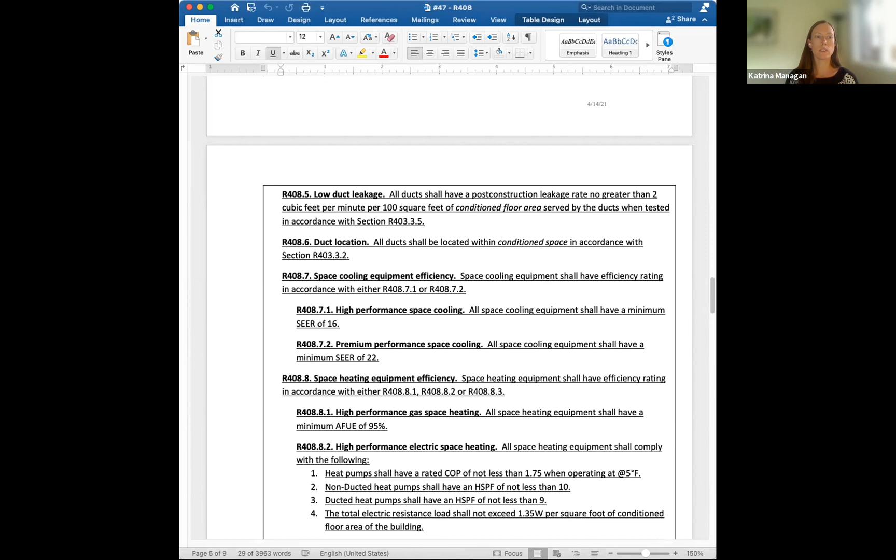So this is the prescriptive path. Then we'll hear the ERI path, which is number 31, and then the minimum renewables proposal, number 67.

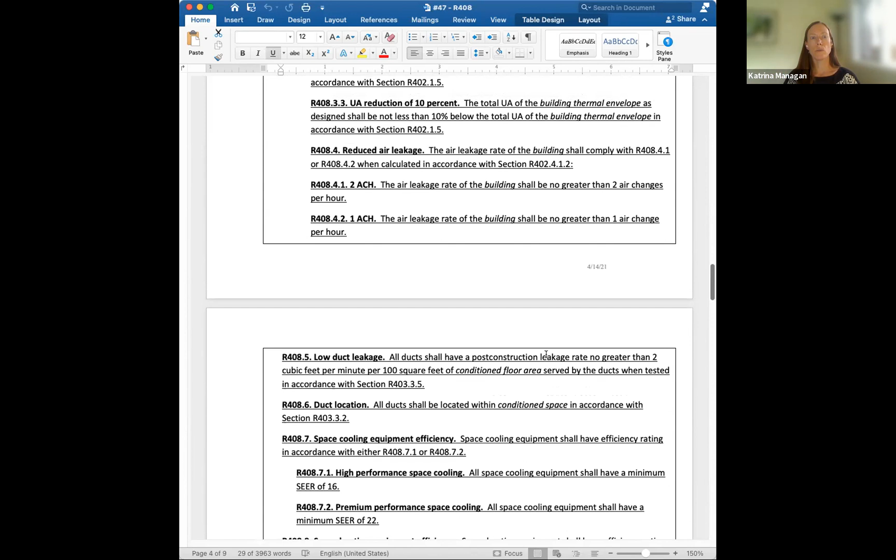We spent a lot of time, to reflect for those who weren't there on the working group process, working through these details to make sure they were right within this proposal and the ERI path proposal, to make sure they're workable. But the level of ambition of how much we're really going to do this code cycle in Denver mostly falls within that third proposal, number 67, the minimum renewables proposal, where there are different pathways. We spent a lot of time thinking through striking that balance of achievable yet ambitious, practical but bold, and finding that balance with the working group. So just know there's more coming on that as we get to that third proposal.

Is there anything you'd add, Sean, just in terms of context of how to think about these three as we turn to residential now for the first time in a while with this group?

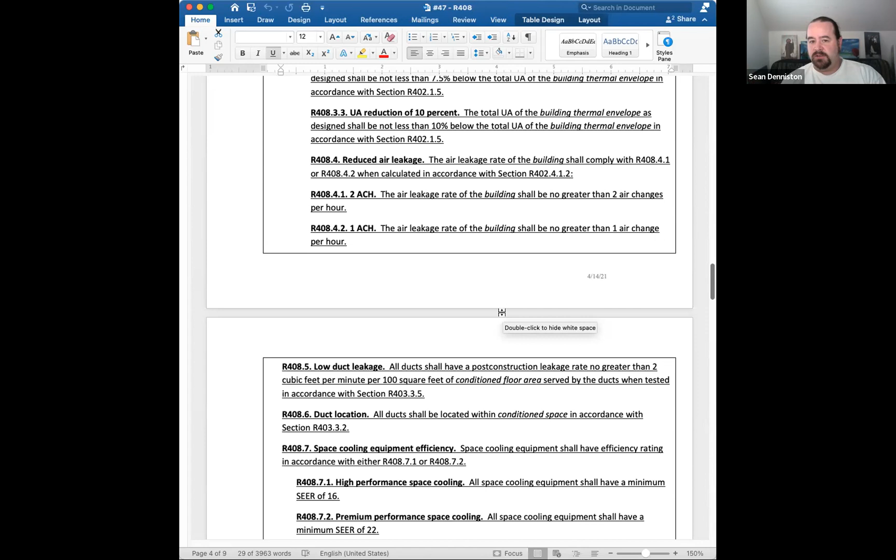I think recognizing that this was fine-tuned, some of the fine-tuning was made to make sure this interacts well with the other compliance paths and with the other proposal about minimum renewable energy. And I'll highlight one thing, since we just finished a big discussion about electrification: there's not a mandatory electrification proposal for residential, but unlike the commercial proposal, there is not a credit option just for water heating or space heating electrification. That's because this proposal creates the credit system completely based on modeling, and all of these were modeled relative to a gas building baseline. So all of the electric measures already account for the benefit of electrification, it's baked in here as opposed to being a standalone electrification credit.

So I figured there might be a question about that. I just preempted it.

Great. Thanks, Katrina and Sean, for the introduction. Courtney, did you have something to add real quick before we go to the general public?

I do. I want to bring up a similar process as we did last time, to see if the committee wants to hear all three of the proposals together, like we did for electrification, if you found that helpful, or if we should split them up individually. So my motion to figure that out would be: would you like to hear them all together? If that's agreeable to Eric and Kevin.

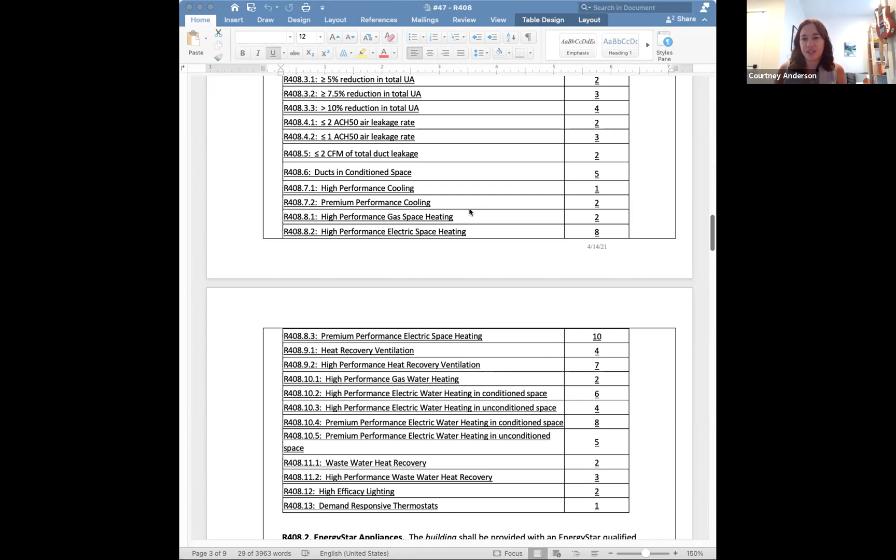Go ahead, Eric. Thank you. It's my opinion that this first proposal is quite substantial. I'm a little concerned about confusion. I certainly won't speak for anyone else on the committee, but I think hearing at least this first one independently could be valuable, and we can certainly provide responses that reference the other two. Considering we've got six pages of amended text here, I'm not sure it's going to work to hear all three at the same time. That's just my two cents, but if the committee would prefer to hear them together, that's fine too.

Okay, so Courtney, I'll ask if there's a second to hear all three together. If there is not a second, we'll proceed forward. If there is a second, we will vote. So is there a second to hear all three of these residential proposals together? I'll ask a second time, is there a second on that? And a third time, is there any second? There's not. Okay, so that motion falls, but thanks for bringing that up, Courtney. We can always do that for the next two if you think that's beneficial.

So we will continue on to the general public. General public, anybody that wants to speak in support of proposal number 47, please raise your hand. Johnny, you have 2 minutes to do so, but before you do, please introduce yourself.

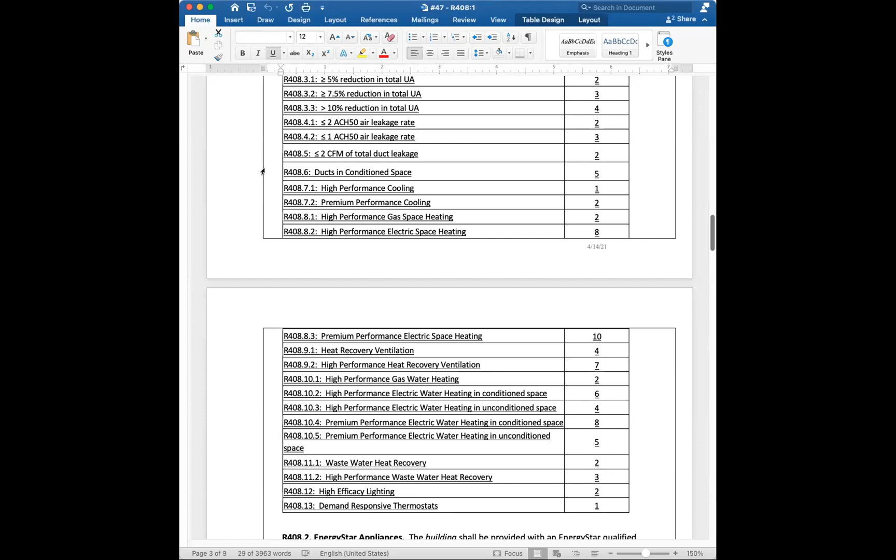Hey there, my name's Johnny Kocher with Rocky Mountain Institute. I would like to speak in favor of this proposal with a few reservations. I think that Rocky Mountain Institute would have rather seen proposals on the commercial side where they're a little more prescriptive and not necessarily point-based. I think it's a little more simple for people to understand. I think these point-based systems do work, I have seen them work in Washington and they had great results there. But I do think point-based systems tend to be a little more complex, and it's harder for some folks to understand.

So I think support with some reservations. Thank you.

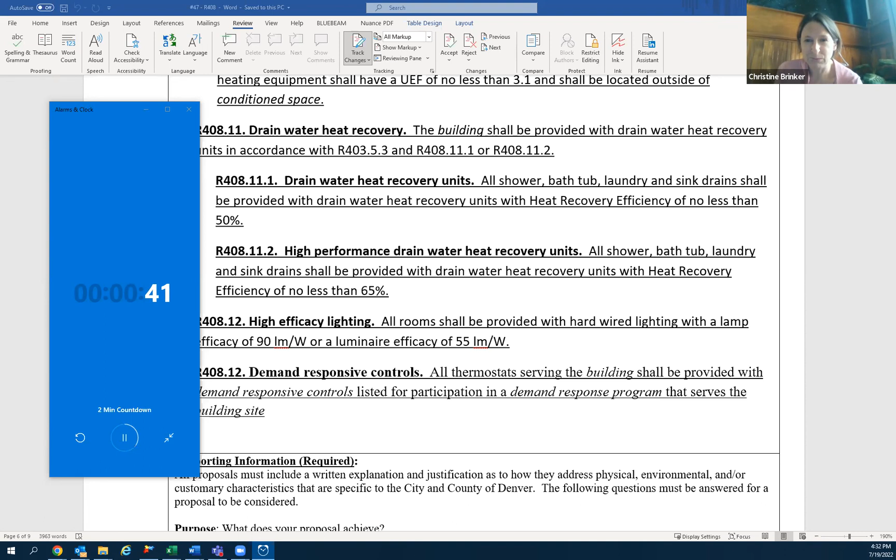Even if you only bumped it up to 20, I think that would make a big difference. It does get to the stringency we need if you combine it with the renewables proposal and someone picks efficiency there rather than renewables. But in reality, almost everyone is going to pick renewables, so they would pick the 18 points from here, assuming they're mixed fuel, plus the renewables. I have concerns about the limited impact of the renewables proposal, which I can detail once we get there. But looking at this alone, or combined with renewables, I don't think it gets quite to where we need to be, though I am fully supportive of the concept. Thank you.

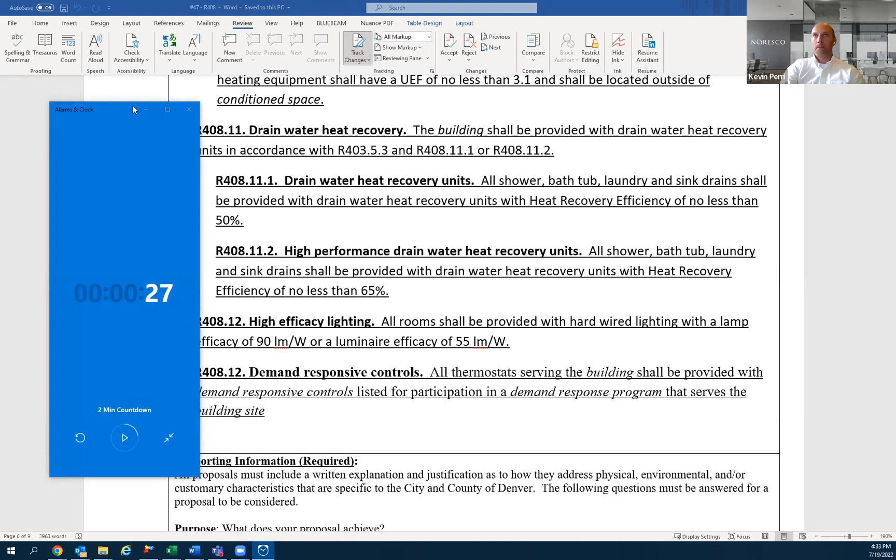Committee, this is your time to ask questions of the proponent. Any questions from the committee? This is a big proposal. Elizabeth, go ahead. Yeah, sorry, I'm still digesting this one as well.

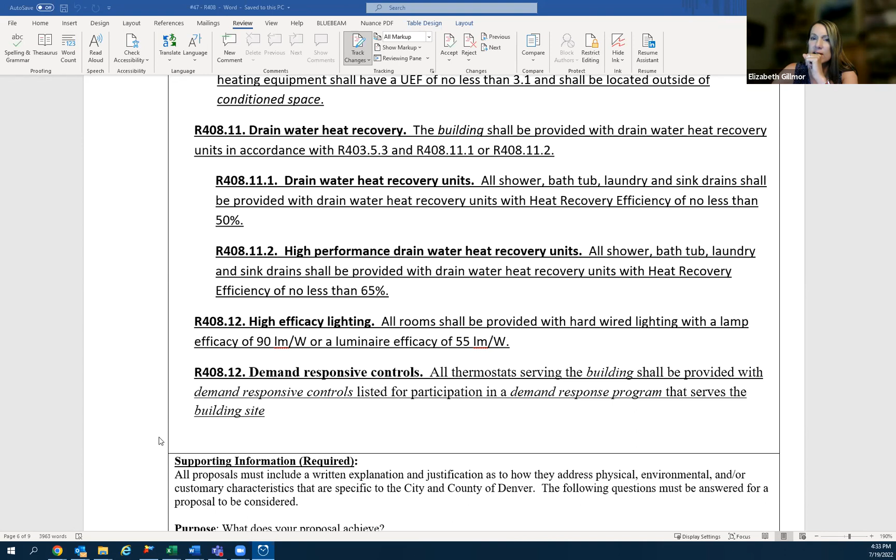But I wanted to, if we could just clarify, maybe scroll up to the top, right where the intro to section R408 is. Yeah, right there. Oh, too far. Sorry, where it says additional energy efficiency credits, right below the definitions and stuff. Yeah, right there, right there.

So for projects that are going all electric, let's say, they would be meeting basically one of the two electric options. So for space heating it would be 8.2 or 8.3, and for water heating it would be 10.2 or 10.3. Let me back up, sorry. So our all-electric project, if they're doing electric water heating, it looks like the way that number 3 is written, they would not be able to take any credit for going to the premium performance electric water heating.

based on the fact that they can't take any credits from section R408.10. So there's also 10.4 and 10.5, and I don't know if that was intentional, that you can't give that project more credit for going the extra mile for premium efficiency water heating, or if that was an oversight.

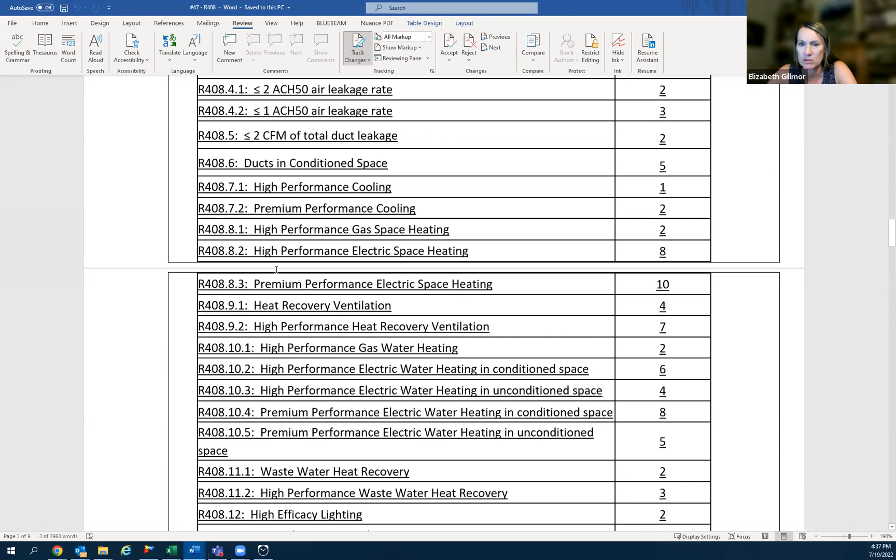What is the difference between these two, besides one is in conditioned space and one is in unconditioned space? Is there a reason to have two different credits here? Could we just say that the efficiency is no less than 2? And then same question for 10.4 and 10.5.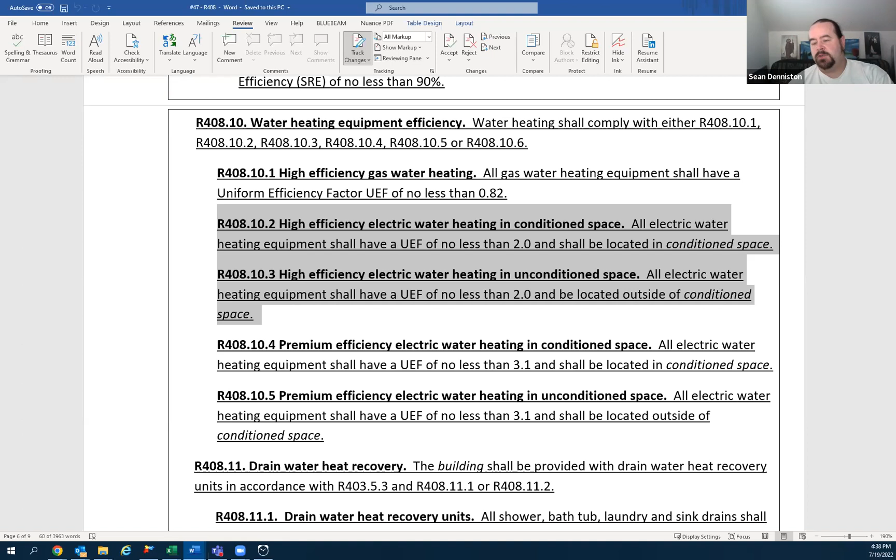So when we did the modeling to determine the efficiency credits themselves, there was a difference in the amount of savings for a heat pump water heater, depending on whether it was in a conditioned or unconditioned space. Oh, I see, because they're different point levels. Got it, and so that's really all it comes down to. Okay, I see. Thank you.

Any other discussions, or anybody want to make a motion? It's getting late, so we have a big proposal on the table in terms of number of pages. I know that's a lot to take in. Hopefully you all had an opportunity to read beforehand before you make these decisions. But if there's no further discussion, we can ask for motions.

Is everybody okay with this? Is anybody not okay with this? Would you be okay putting this into the hands of the working group?

Courtney, go ahead. I'm open to further discussion from the committee, but I will make a motion to approve as written. There's a motion to approve, but she is open to further discussion just to keep the conversation going.

Okay, I'm seeing no discussion happening, so I'm going to keep things moving. I'll ask to see if there's a second on the motion to approve. This is Paul Kriescher, and I'll second that. Okay, Paul seconds.

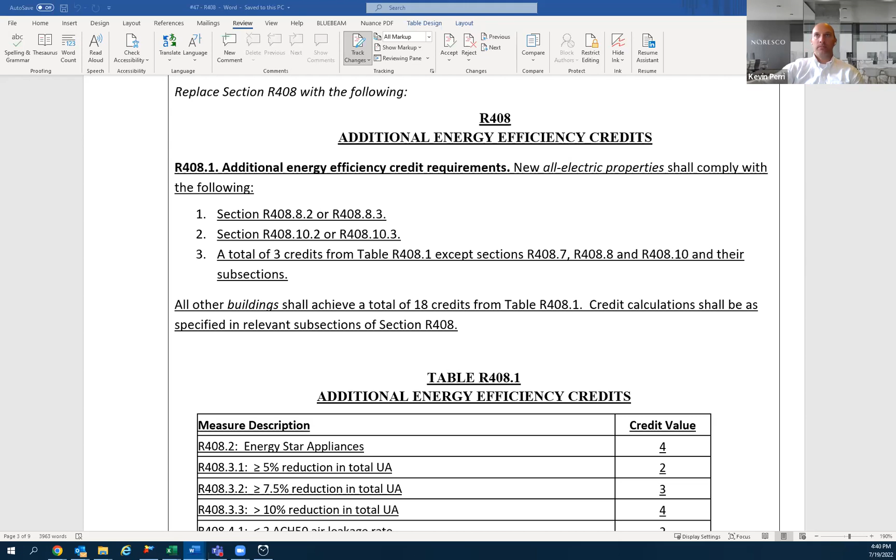I see 13, go ahead and lower your hands. Okay, all are lowered. All those opposed, please raise your hand. Go ahead and lower your hands. And all those abstaining, please raise your hand. One, go ahead and lower your hands. Okay, this passes 13 to 1 to 1.

So that brings up our next item of business, which is item number 31. We already had a brief introduction from Katrina on the working groups on all three of these. So Katrina, if you have anything else to add, feel free. If not, we will go to...

Sean/Robby. I'll just add, I won't show you the working group members again, it was the same group. I'll just note that this proposal links the ERI modeling path to the city's goals, and that it has been refined to not require solar. And we combined two proposals, number 19 and number 31, to make this proposal out of the working group.

And similar to the other one, the working group spent a lot of time making sure the details are right here, and that generally the calibration was in line with our goals. So go ahead, Robby, with the description of the details.

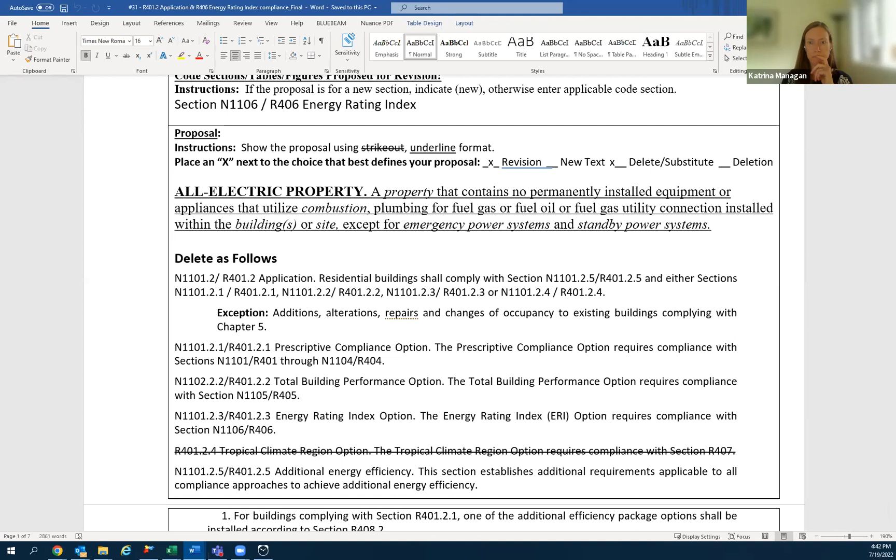Yeah, starting from the top to the bottom, all electric properties is becoming a defined term, which is straightforward. The tropical climate region is taken out of this for the R401 compliance options, because obviously it's not applicable to the city of Denver. In the additional efficiency options, the R408 section is removed for the ERI pathway because the ERI score threshold is already achieving the goals of the additional efficiency options there.

As you may remember, in the 2021 code, they removed the language mandatory and just replaced it with requirements. So this requirements table is telling you what is required based off of the Section 401 requirements that used to be considered the prescriptive requirements for the house there. A few things have been added to make the requirements for all the pathways, the different compliance options, equivalent to each other with regards to those things that are really dealing with the installation of an item, not dealing with the R value or U value of the item. Those are things that ultimately can be traded off there.

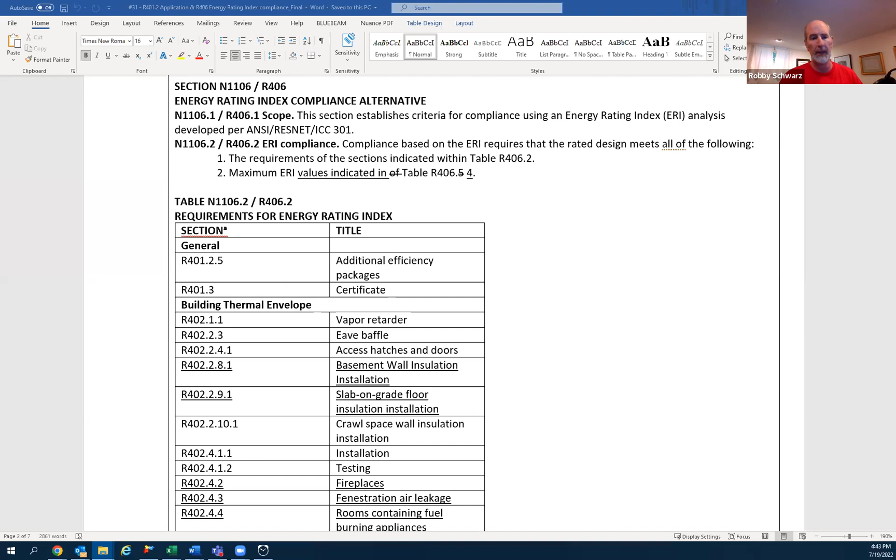The rest of the proposal has really been, the objective is to really simplify the energy rating index pathway to bring it into alignment with the ANSI RESNET ICC 301 standard by removing the ventilation amendment that was in the body of the code that made the ANSI RESNET 301 version of the energy rating index diverge from the IECC index. Now they will be equal in essence to each other.

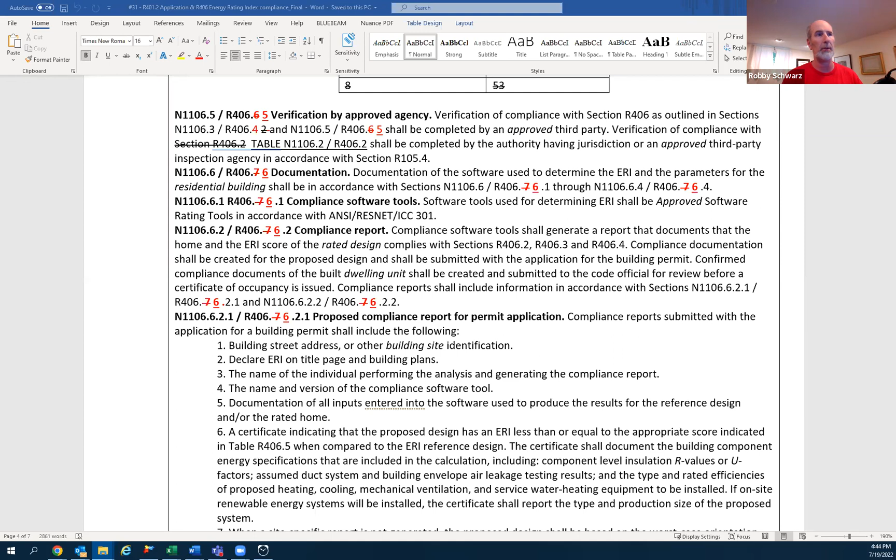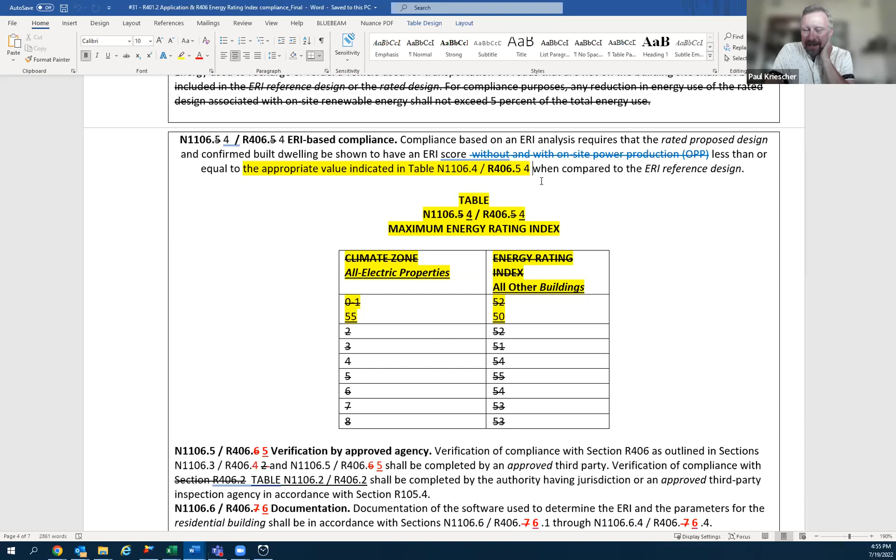I'm not a committee member, but I would suggest that we type in right where the cursor is, I believe, without renewables, so that people can see that language. And then I would propose that somebody make a motion to pass. Right. So I would make a motion with that wording being drafted in, something to that effect. I'd like to see that. And then...

Okay, so Paul has made a motion to add the text without renewables in 1106.4. We want to say without or prior to. I know, it just allows it to be a little more leading that people should still think about solar, I guess. But so that would be my preference, to say prior to renewables. Okay, so there's a motion on the table to add text. Is there a second to that motion?

There isn't a second that will fail. Mike, go ahead. I'll second. Okay, Mike seconds that.

Any other discussion? Anybody else have anything else they want to talk about? We'll call a vote on just that modification to section N 1106.4/R406.4 to add prior to renewables as it's on the screen.

All those in favor, please raise your hand. I see 14, go ahead and lower your hands. All those opposed, please raise your hand. Zero. And all those abstaining, please raise your hand. One. Go ahead and lower your hands.

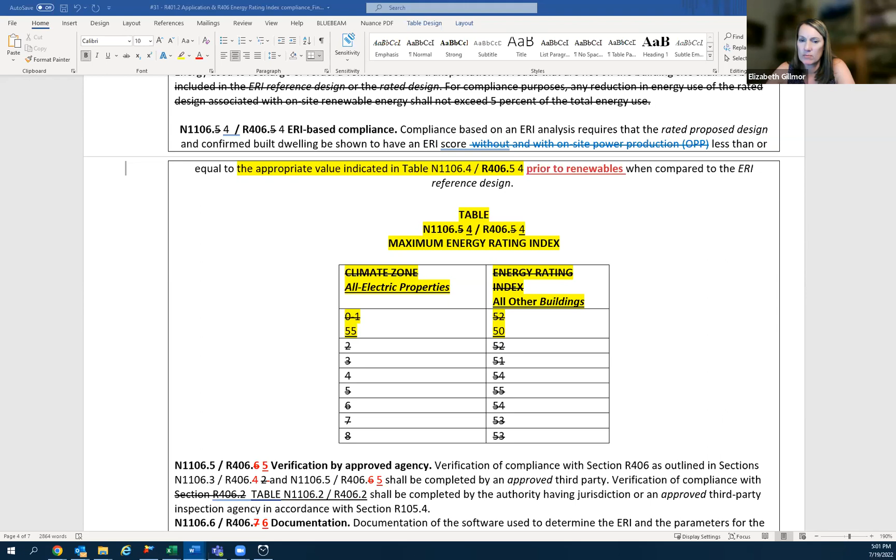Thank you. So hopefully that definition or that bit of supporting detail might make you feel a little more comfortable on this, in addition to knowing that there was a subcommittee that helped come up with it. I'll say one more time here that all-electric properties were defined at the beginning of the proposal as well.

Okay, great. So there is a motion on the table to approve. Is there a second on that motion? This is Paul, I'll second that motion. Okay, thank you, Paul. And remember, if you are not comfortable with this, you are still able to vote in opposition, which is fine if you're not quite there. So there's a motion to approve as amended and a second.

I will call a vote. All those in favor, please raise your hand. I see 10 — okay, go ahead and lower your hands. 11, sorry, one popped up last minute. My hands are down. All those opposed, please raise your hand. Zero. And all those abstaining, please raise your hand. That's 3. Okay, so it passes.